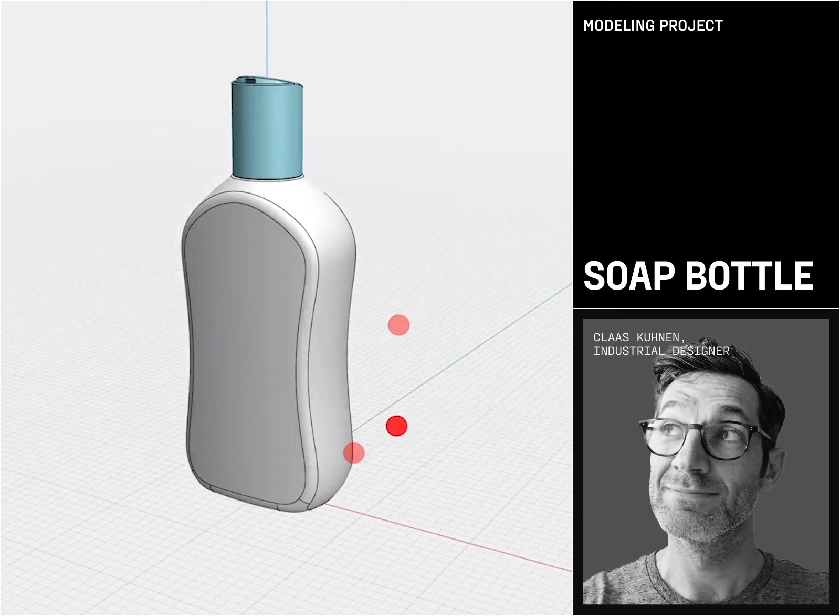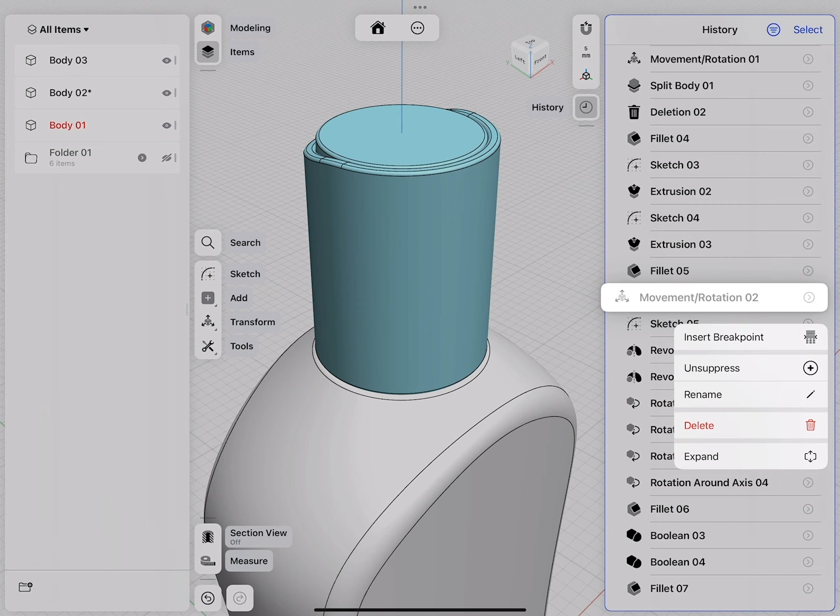Topics we will take a look at include all the necessary sketches we have to create, and then how, by using the history line step by step, we are going to create the building blocks of our design, and then use these basic building blocks to start adding all the details, for example edge roundings, inside shelling, and fillets, build the piece outside, create a functional cap, and even use the ability to resume and suppress features to prototype various stages of how elements could be rotated and manipulated.

And then we will finish with a really nice looking product presentation, adding some colors to the background and materials for an adequate color material study. And with all that said, let's do it.

So here we are inside a new and empty design. The first thing we want to do is make sure all our snap options are turned on and also our unit system is set to millimeter. A bottle is a revolve body.

So the easiest way to start is by going to the front and creating the front profile to revolve. I'll move the screen down a little bit. Go to sketch and we will start with the line tool.

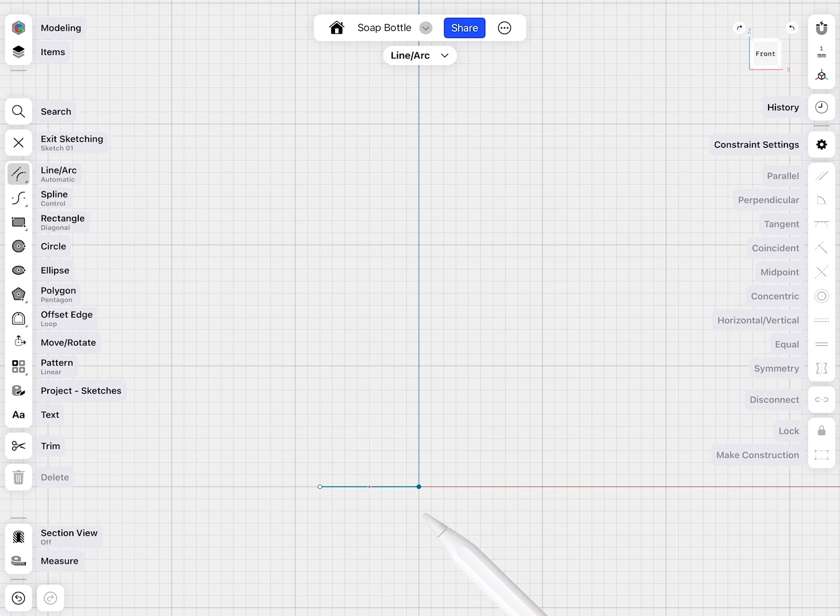At the center of the sketch where Z and X meet, draw a line to the left side. Select the first point, that is the center of my bottle, and hit the lock icon, because this point I never want to move. This line I will dimension to 30 millimeters, select the line, and also constrain it to be horizontally aligned. I can zoom out a little bit.

Then I draw a line straight up. This line will be 150 millimeters and vertically constrained. Zoom out a little bit more.

And then on top, I can draw a line to the left side, make sure this is horizontally constrained. And this is 15 millimeters. This is, for example, the top diameter, and 30 is the bottom diameter, and the 150 is the height of the body.

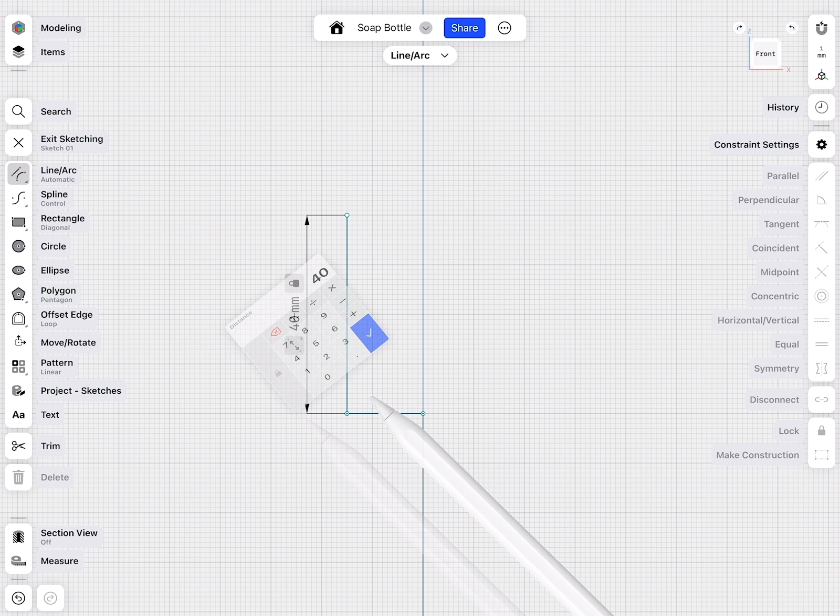Since we have the line tool active, we can zoom into the top and actually put in a preliminary geometry for the cap. This will be 40 millimeters up, vertically constrained. Then I can go to the right side and go down and make sure that these two lines are horizontally and vertically constrained. So now, as you can see, I have 150 and I have 40 millimeters.

To show the dimensions all the time, we can turn on always show the dimension, also always show the constraints, or leave this off. And then when we select the line, we see everything that is important.

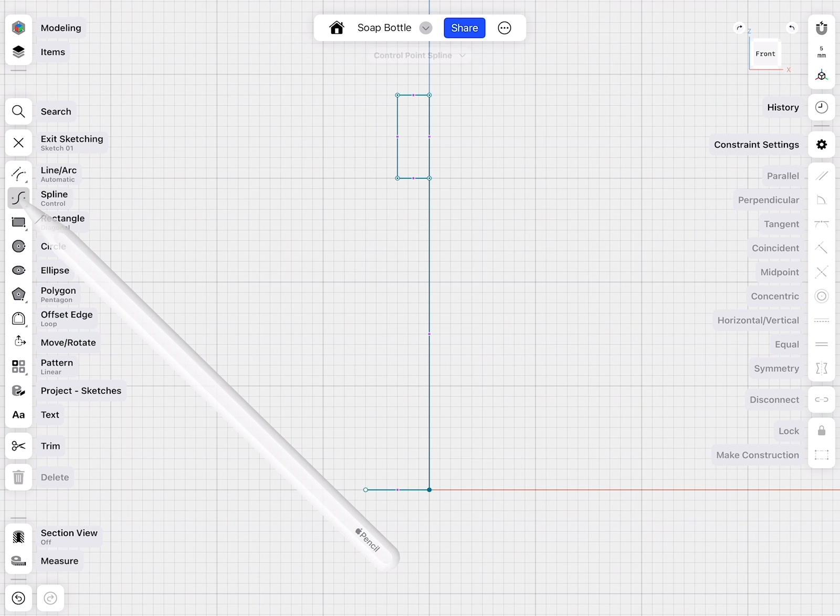We can now actually go ahead and create the spline to sculpt the shape of our bottle. Go to the spline icon, double tap it, and then you have the option between the control and the fit point. We're going to use the control one.

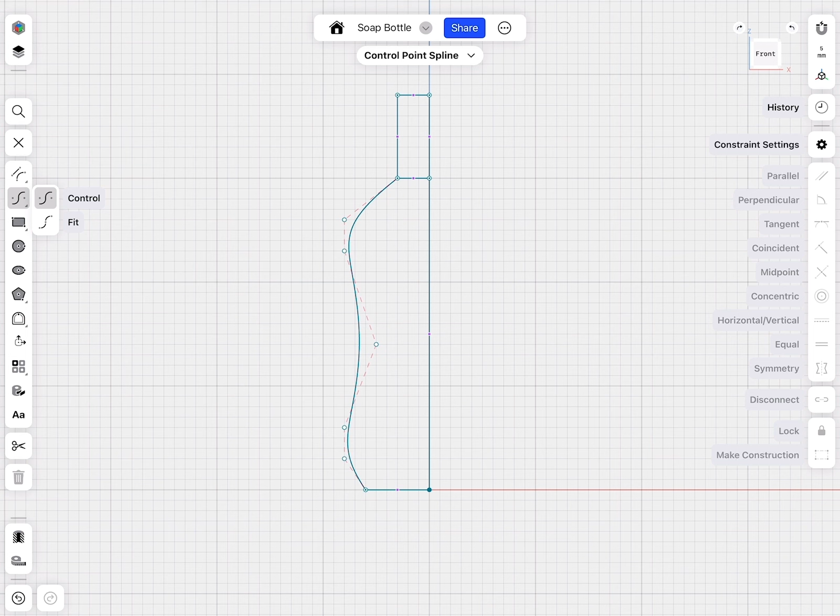So what I will do is, from the top, I start drawing, and I press, go down, press, go to the center and inwards, press, go down, outwards, press, go down, press, go to the end, and release. And you see this creates a really beautiful shape.

What I can do now is play with the distance of how far these points are apart from each other. So here I will make this a little bit smoother by bringing these points down so they all have exactly a similar distance to each other.

On top, I would like to have a sharper corner and also a nice and long part on the curve. So there you see the distance is actually much longer between these two points than these two points.

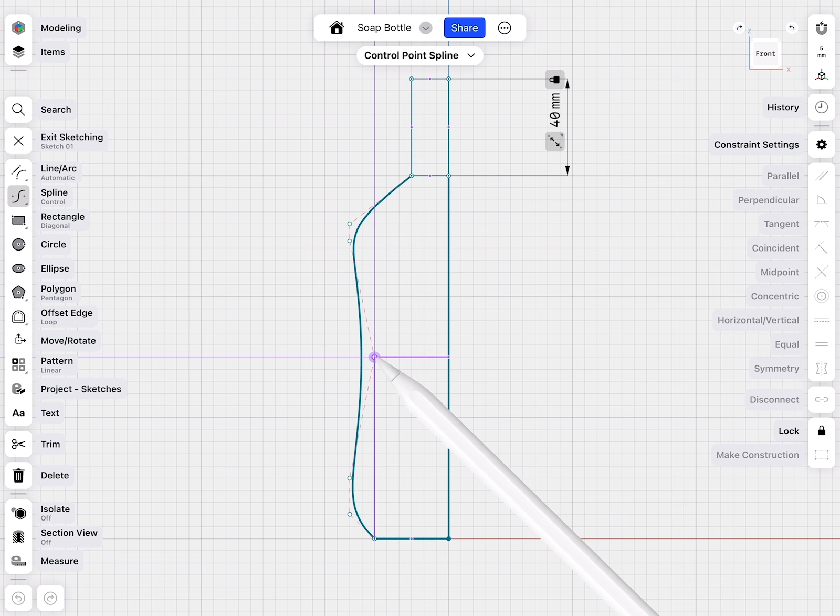And then with this one here in the center, I can play with how much this bellies in. And that, for example, is in the space where the fingers kind of go around the bottle.

At this point, we kind of have everything to make a quick prototype. So we'll select in the sketch the profile of the bottle, then select a vertical line with the z-axis and click Revolve. This hides the sketch.

So we can show the sketch one more time. And then select the sketch profile again, select an axis and revolve. Beautiful. That's good.

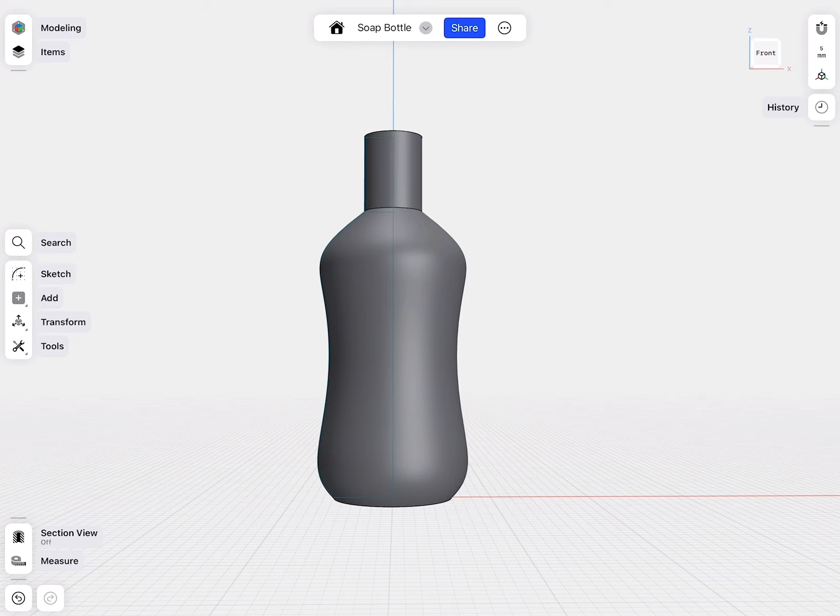What is actually really nice is we can go ahead and select the sketch, go into sketch edit mode, select nothing, and then when we select individual points, we can move them around and see how this updates the shape of our bottle on the fly. That's actually really beautiful.

Even history-wise, the sketch is created in front, so before the revolve bodies, we can edit steps at the beginning and see how this influences the rest of the construction in real time. This is super amazing, very good.

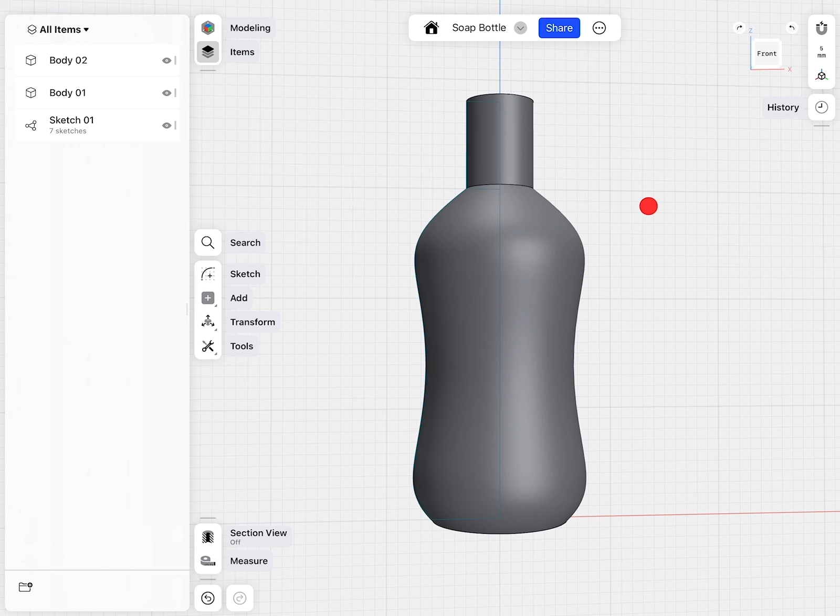This bottle is very round, and all I want is from the front to see this nice curvature look, but actually from the side it should be more flat. So I need another sketch. I will go to the bottom.

Then I will go to sketch. And you see actually when I do this, I have all these sketch intersections to prevent, for example, any accidental snapping. I can turn everything off and then actually create the circle so I don't snap to a piece of a sketch or geometry where they intersect.

Very good, change my view, rotate, exit the sketch. Then I can show everything. And you see that the sketch also sits directly at the bottom of the bottle. So you can just select the sketch and you see where it intersects with the bottle.

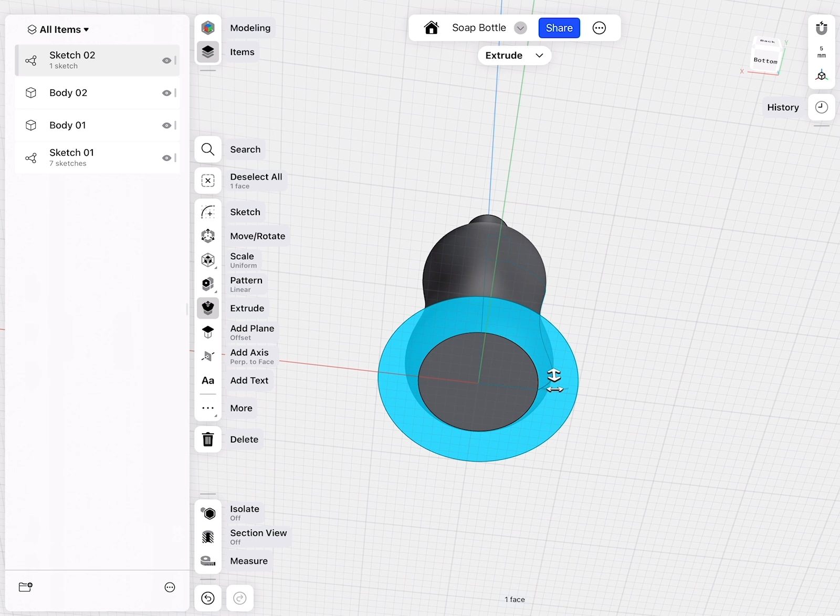This is a new profile to select, and that's not really what I want. So what I will do is select the sketch, exit it, and then simply move this down a little bit. How much is up to you. Beautiful, you see now I have just one sketch profile.

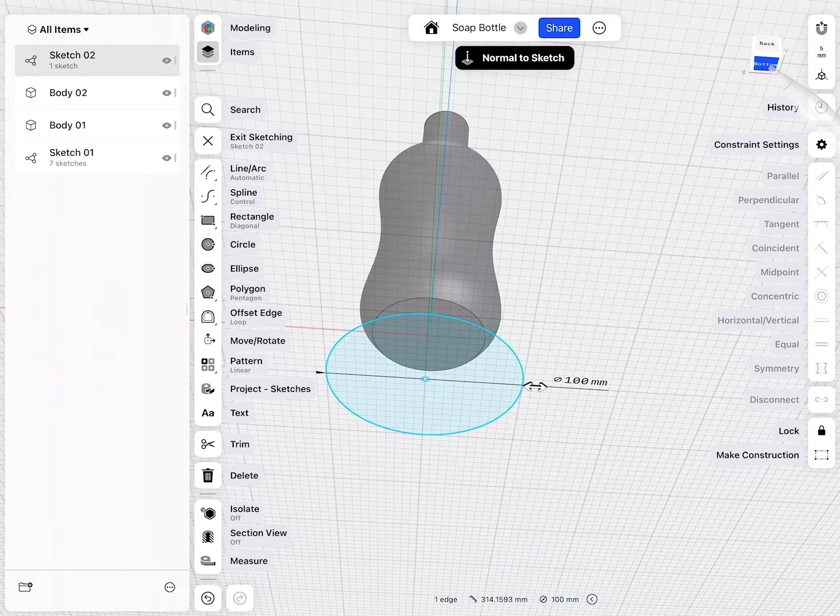So let's select the sketch, going back to the bottom view. And with the spline command, I can now go ahead and draw myself a nice curve. And there, beautiful.

When these two splines are not connected via a symmetry constraint, I can model every spline basically independently. And if I would like the front and back spline to function like a mirror, then I have to create a Y and an X symmetry. So let me show you how we can do this.

This is very easy, so I will select the line tool. Along the Y-axis I make a line, and along the X-axis I make a line. I select both lines and lock them so they don't move.

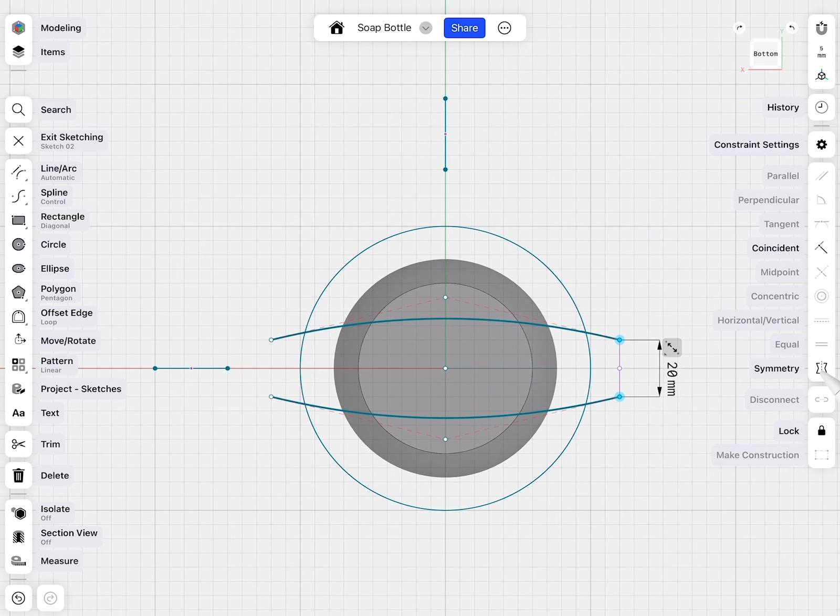Select nothing. Then I select two pairs of points, symmetry and the X-axis, the opposite symmetry axis and the center points and this axis line. When I now select one point, you see the opposite moves.

Pretty good, but you see here, when I go left and right, now the right point doesn't move. So this is where we will select the left and right points, symmetry, and then we lock this to the other line. And then when we go ahead and move these corner points, there we are.

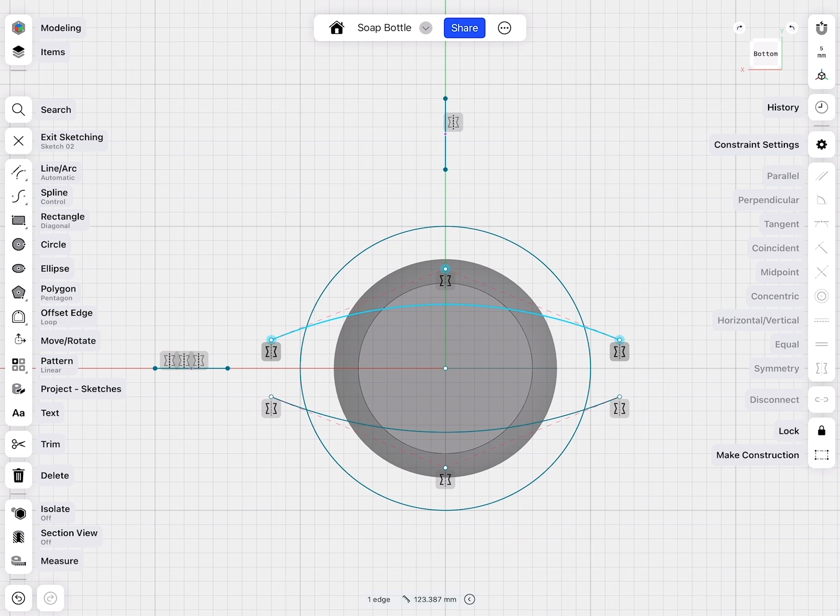Now I can go ahead and, for example, move this one up, move this one down, or stretch this out. And by this, essentially with this line, I can project how I'm going to slice the bottle. Okay, so let's do this.

We will exit the sketch, select nothing, select the sketch profile, and then hit the up arrow, extrude, and then we cut through the bottle.

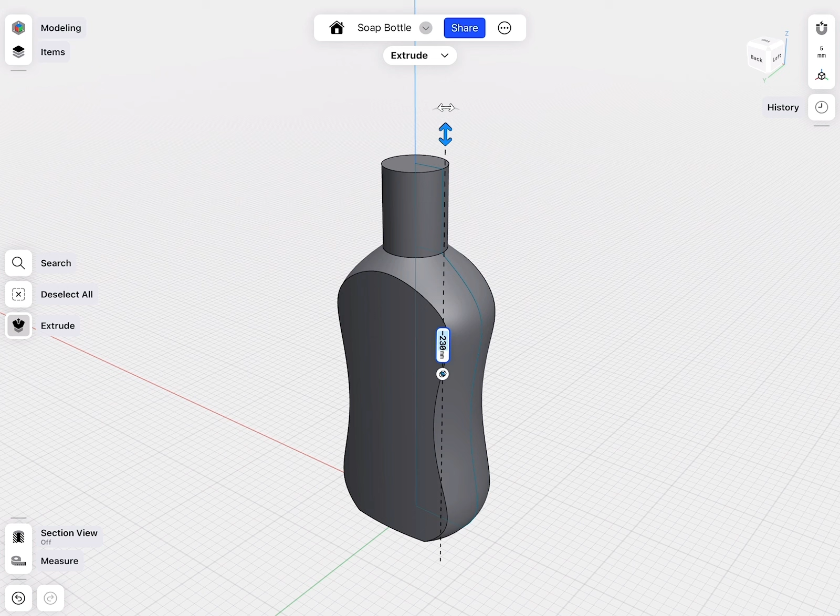Obviously, I don't want to remove the bottle, I want to actually remove the outside. So by clicking on this tiny icon with the white sphere and the blue cube, I can get into the Boolean command and decide to either union, new body, subtract, and actually I would like to use the intersect command. That basically gives me the volume of how these three objects, the cap, the bottle, and the thing I extruded, intersect.

Beautiful, very good. Again, one little tiny demo. When I go back to editing my sketches, I see everything in real time. It's actually really nice how this works.

And the same is also true for this one here. I don't have to go even into a 2D view. I can prototype this by selecting the sketch, go into sketch edit, and then use the grid for the movement. There we are, perfect. Okay, so this looks actually pretty good.

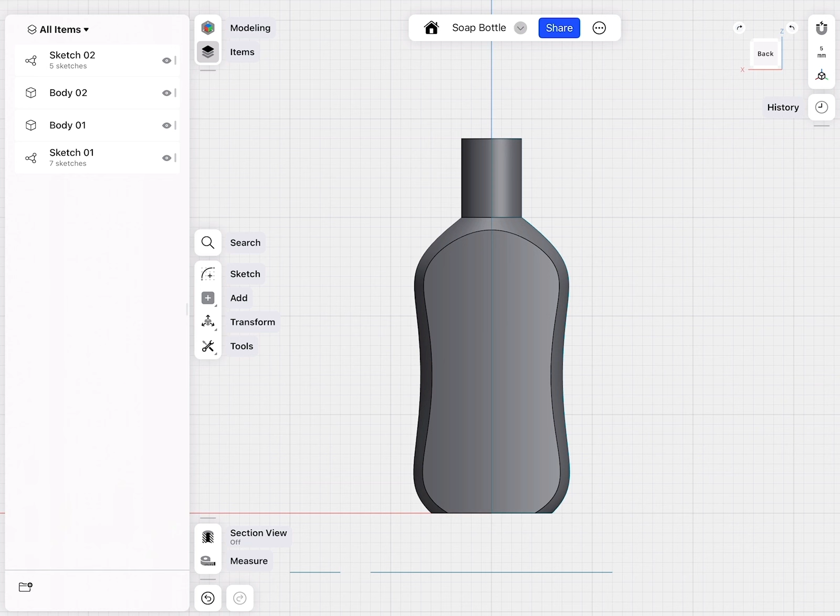So we have the main bottle and the cap, but we don't really have the neck that goes onto the bottle.

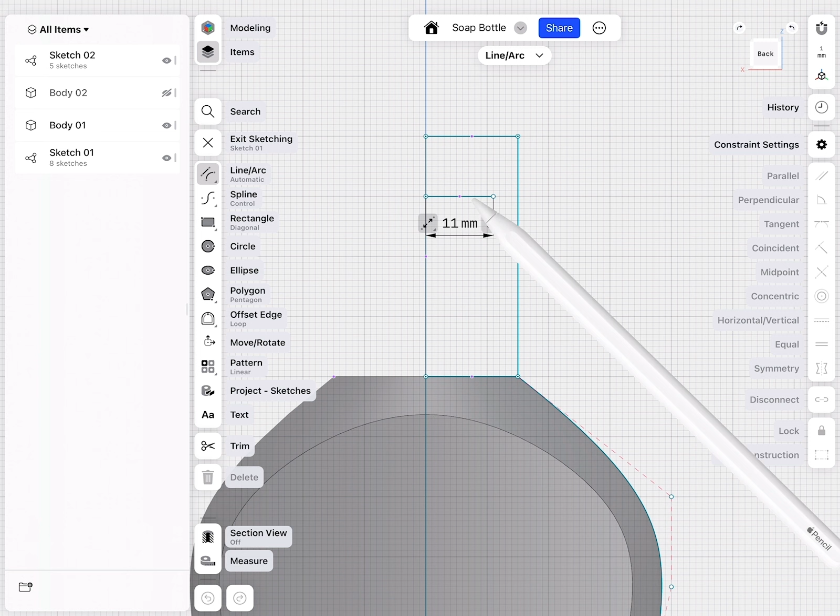And this is where I will go ahead and select the first sketch we created and edit it, and create two more lines that go inside. One line to here, this should be 11 millimeters and horizontally constrained. And then one line straight down, vertically constrained, and this line should be 30 millimeters. Very good. Cool, okay.

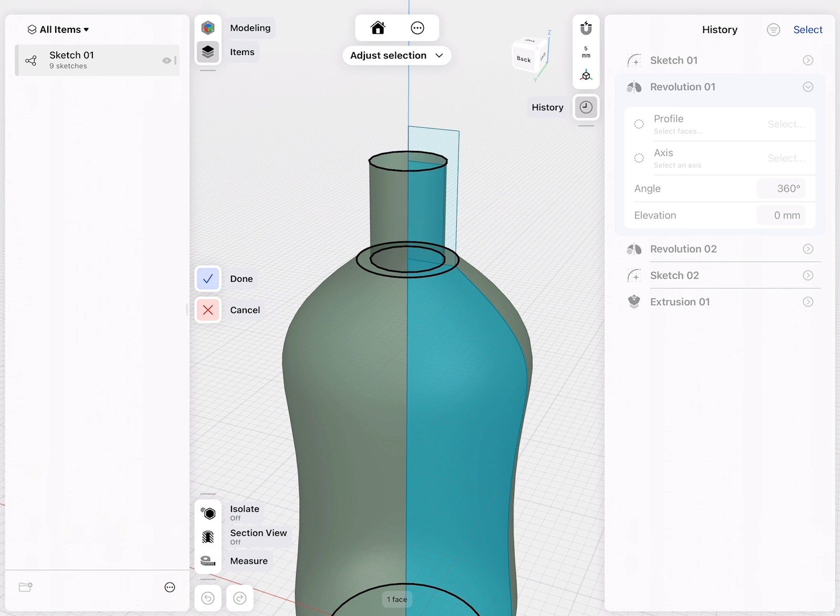When I now open the history, you see I have my first sketch, my two revolutions, my second sketch, the extrusion, and when I click on the first revolution, there I see that this is actually the feature that created the main bottle. I click on the arrow on the right side to expand it. Here I have profile and axis. Click on edit for profile, and then I will add this sketch profile I just created to it. Click done, and I have updated my design.

That's actually how easy you can create different iterations, and you start with very basic models, and then step by step we create more refined complex models. Very good.

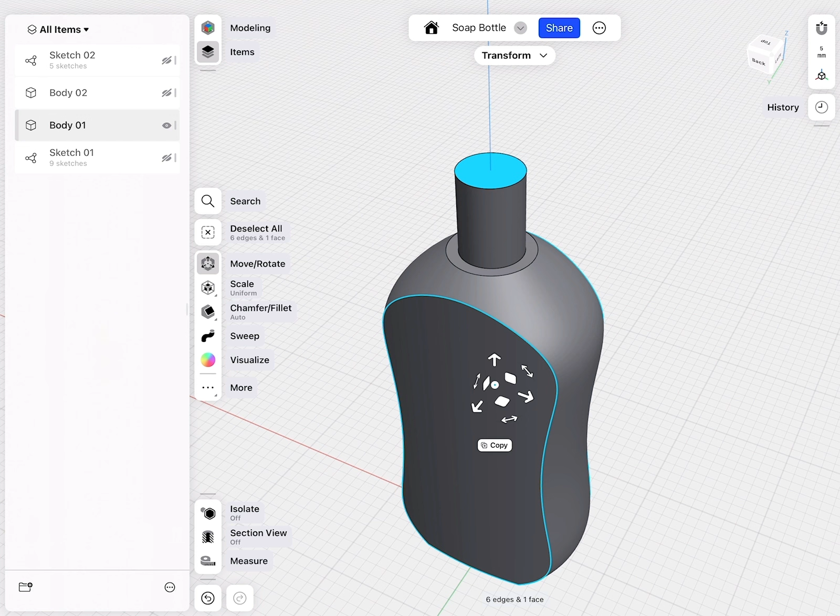So let's actually refine this bottle. I will turn all the sketches off, so I only see this bottle, and I can pay attention to how these edges all meet. There are various different ways how we can fillet them and round them. We want also later to shell the inside. So before we do our shelling, we want to round all the sharp edges on the outside, because in the shelling command does actually the work of the inside, because the rounded edges will shrink down to the inside. And we'll see this in a moment.

When I select this edge, just as a demo, just don't follow it, just take a look. You see how I can round this vertical edge. Then I get these nice rounded corners, edges, and then I can round this a second time. And then what you see is we get this connection where we have kind of like two profiles which are rounded, and then this centerpiece. But we have here very sharp corners. That's not really very nicely looking.

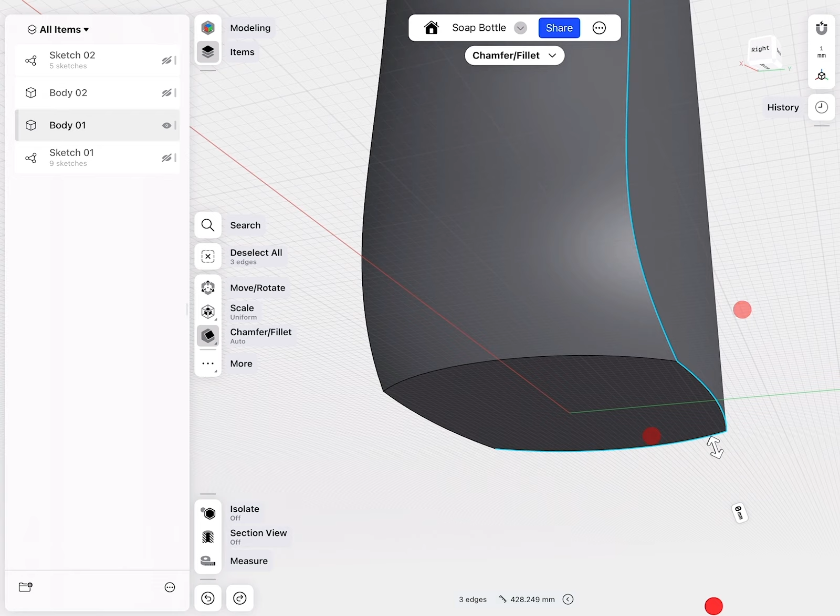So I undo everything. We can actually select all edges at the same time. There we are. And then we drag the arrow to round this. And pay attention to how this looks. This is nice. And then we click the cog icon and switch the corners from rolling ball to setback. Takes a moment to calculate and take a look at these beautiful corners. They look actually really great.

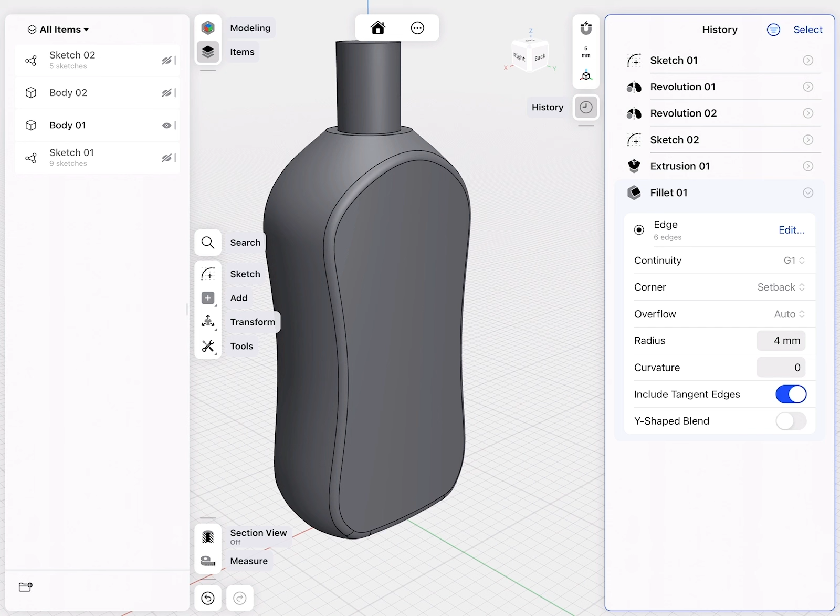We want to adjust the radius of the fillet. We can go to History, look where the fillet command is, click on the arrow to expand it, and then change the radius. There we are, it's very easy. We could also select a face of that fillet, and there you see it says Edit Fillet. When we click on this, then there we go back to the original command, and here we can change that value. So same thing. Okay, so this is actually done.

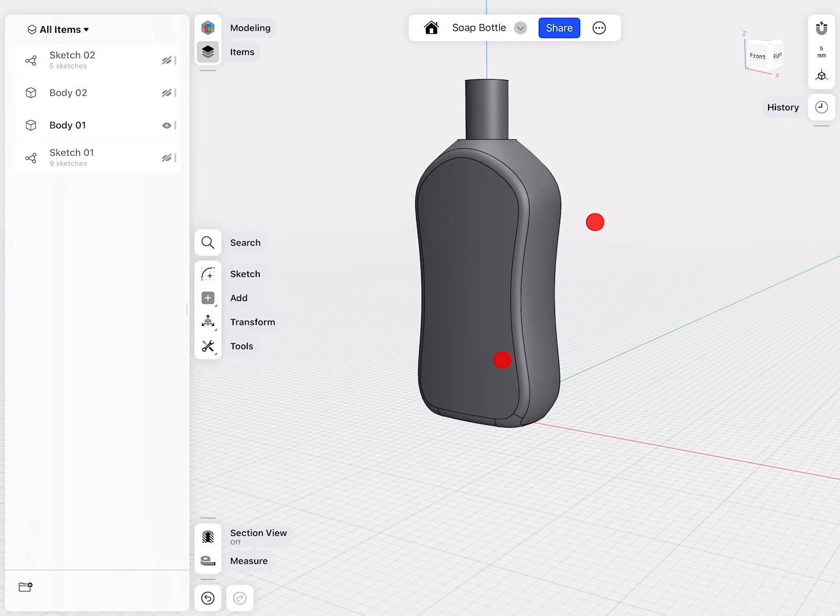That's good. This corner we can keep sharp. That is fine. This one I would like to round a little bit, 1 millimeter. This looks sufficient. And now actually the bottle is ready to be shelled.

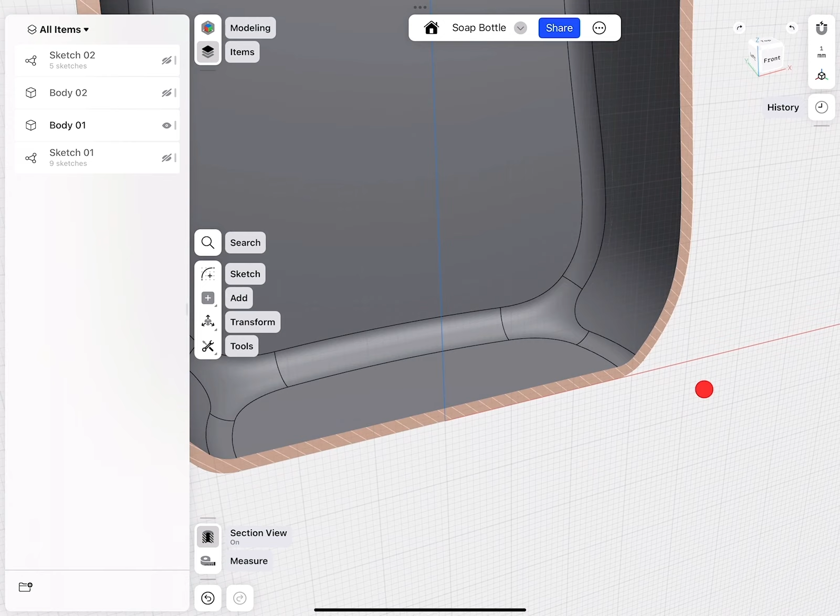So I can select the top face, go to shell, and I will select 2 millimeters, which is a little bit thicker. I do this on purpose because it's an easier surface to see. If I go to the front view and then at the bottom left select section view, we can take a look into that space. And there we can see how we have also inside all the edges. See, that's the reason why we fillet the edges first, and then we do actually the shelling, because it does create this for us in the inside with a perfect material thickness.

I have here a very sharp edge. If I would like to round this, I could also round this fillet, sorry, this edge, say by 1 millimeter. Very good. Let me show you something.

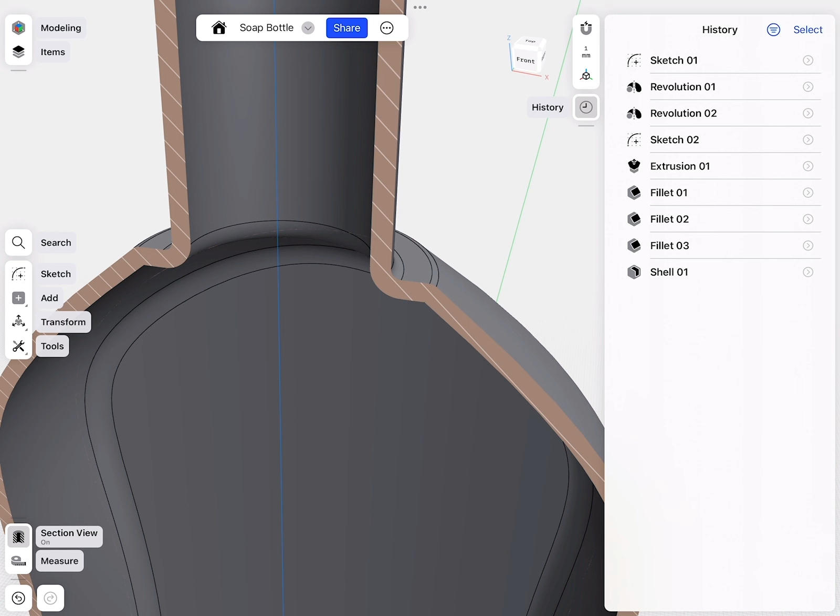If I go to the history view, here's my shelling command. Here is that fillet command. And if I press onto it, hold, I can drag this in front of the shelling. And there everything is updated. Beautiful, pretty nice. This is actually a pretty big fillet. Change this a little bit. You see everything updates for us automatically. Pretty nice. Very good. Okay.

We can zoom out a little bit and then go to turning off the section view, and there we are. So we have now actually the main bottle and the neck done. We don't have the threading. The threading is something we can do actually later. It's a complicated task, and this actually only makes sense when also the cap is done. So let's go ahead and prototype the cap a little bit.

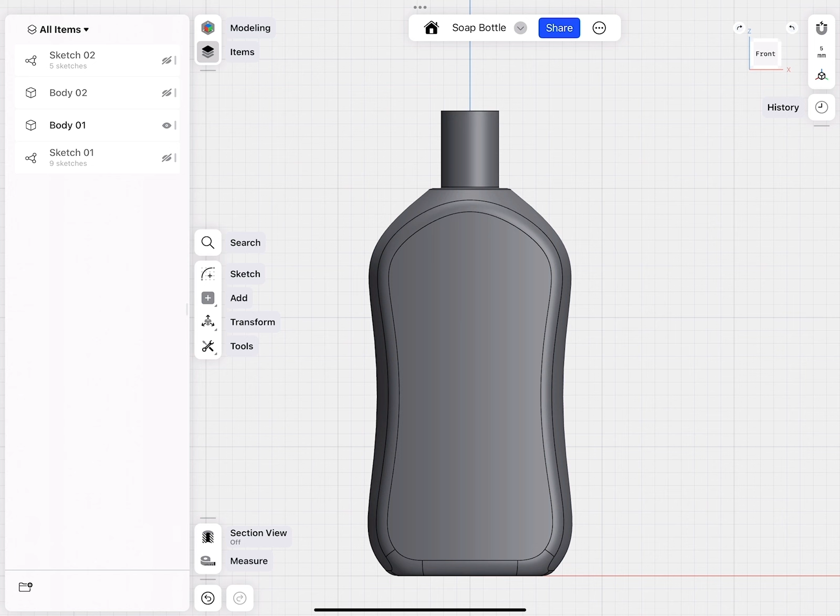I will go to items. Sketch 01 was the first one we created. That has the basic dimension for the cap. Currently the cap is only a cylinder. We would like to change this obviously now.

Let's go ahead and edit this cap. I would like to have a wall thickness of 2 millimeters for this cap. And the cap actually has a lid on top that can swivel.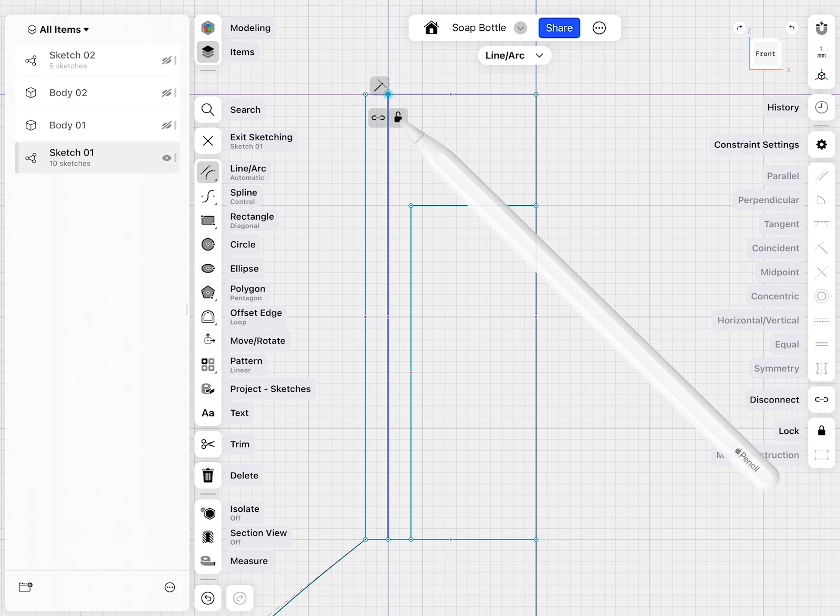So I need to define now a vertical line here. I draw one line down. I will also hide the geometry, so this is easier to work. You see I drag the endpoints onto the edges, make sure this is vertically constrained. Then I can select these two lines and make sure this is 2 millimeters.

Very good. This is good. Perfect. We have a swivel. So here's the horizontal line, and this should be around 4 millimeters. Perfect.

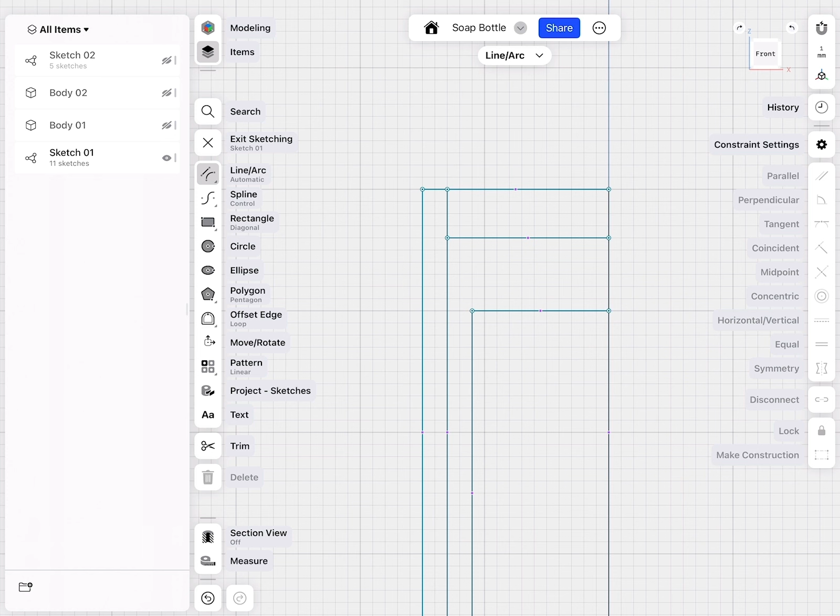Now when this cap rotates onto the neck, it should seal it a little bit. So I would like to have here a very thin horizontal kind of cap or lid that goes over it, and then we cut a hole into it for the fluid to come out. And I need one additional horizontal line, at 1 millimeter. Very good.

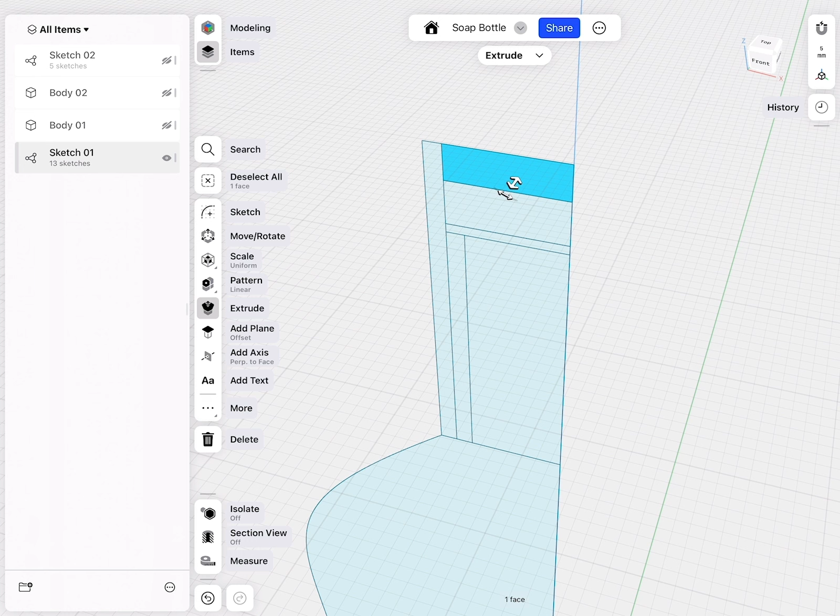So if I zoom out a little bit and only select the elements for the cap, main body, that's this. This is actually the space where the threading goes in. This is a cavity. And then this is the part of the swivel, kind of like the button that can rotate to open and close. Very good.

And as before, we can go to the history. In this case, it is Revolution 2. There we are. Open this, go to Edit Profiles. And now I deselect everything and then just select only what I want. That is it. Click OK.

There we are. Look, we have actually updated that geometry. So you see, we don't really create basic geometry and then make new ones. We actually build basic geometry and then we can start adding more elements to it.

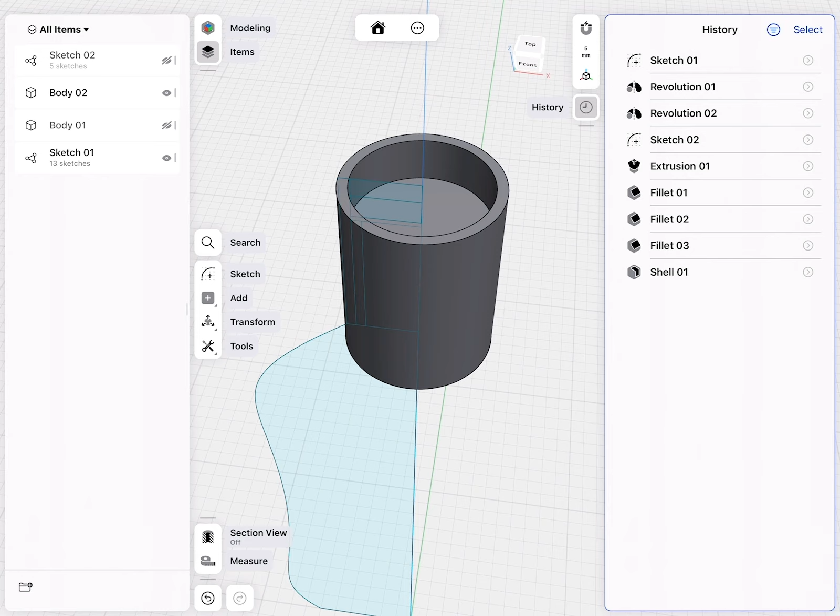We can close this a little bit. There we are. We can then select this upper sketch profile and select this line and do a revolve. That, for example, is the part that can rotate. Just with a finger press, we move one side down and then the other side goes up.

Okay, beautiful. Good. So the interesting element now will be to prototype the mechanics. So this is a cylinder that sits inside an open cylinder. To rotate, this is not necessarily going to work this well.

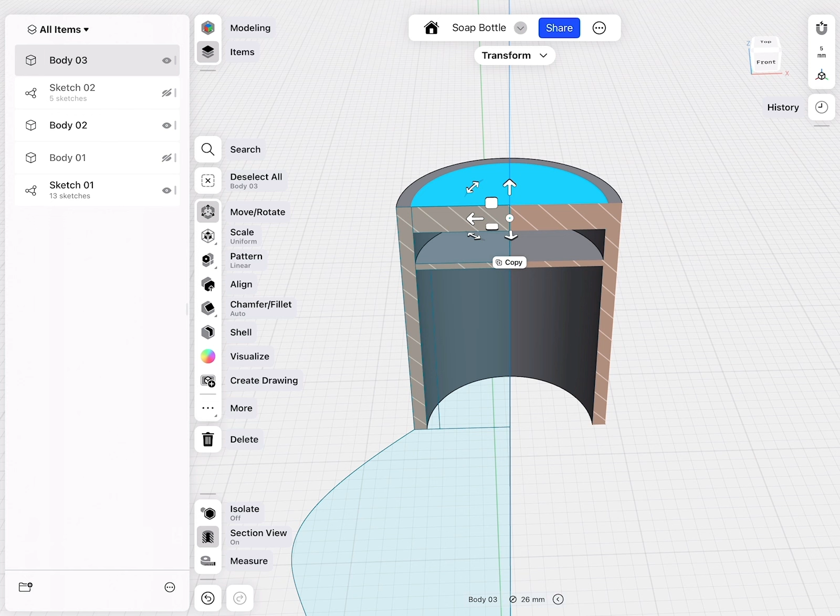We might need to change the thickness a little bit, or we can also round this a little bit. So this is actually going to be the rotation axis. So that dictates that from the front, when we go back to the sketch, turn off the section cut,

Right here between these 2 points, this straight line needs to be changed a little bit. Kind of like it needs to be a little bit round. So we can do this very easy by turning everything off so it's easier to see. Then I will go to the line arc command and create here an arc. There.

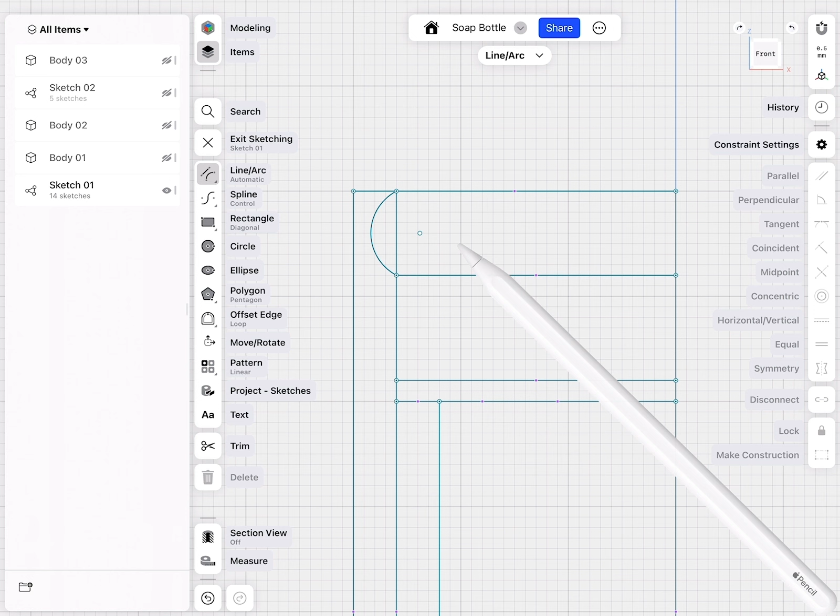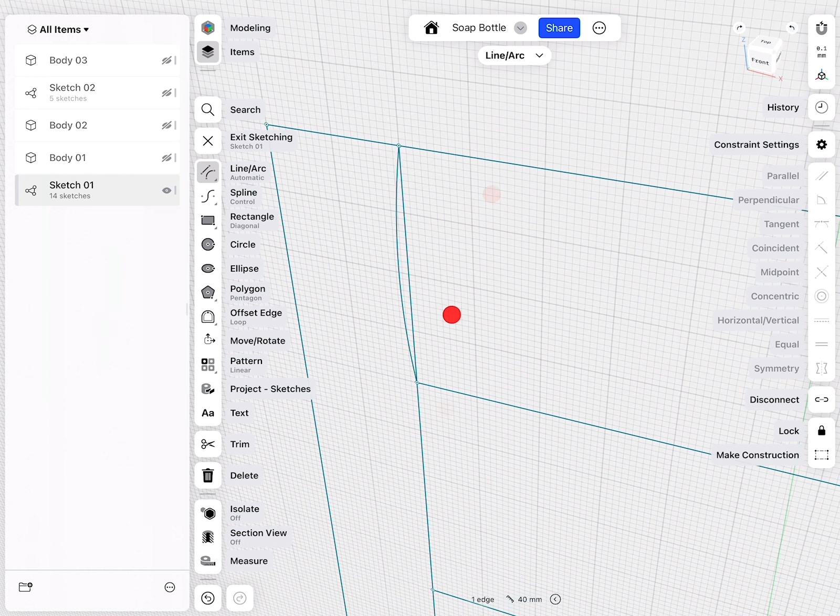And then this point I simply drag over onto this axis, because that is the revolve axis. And this tiny extra profile I created, this one, I need to add to the rotatable part for the revolve and also remove from the housing. So can go ahead.

Here we have actually two movement commands. I can press and hold and say delete. I don't need those. There we are. Very good. And there is this revolve command. I can go to profile and then I will add this one simply to it. Beautiful. And there you see.

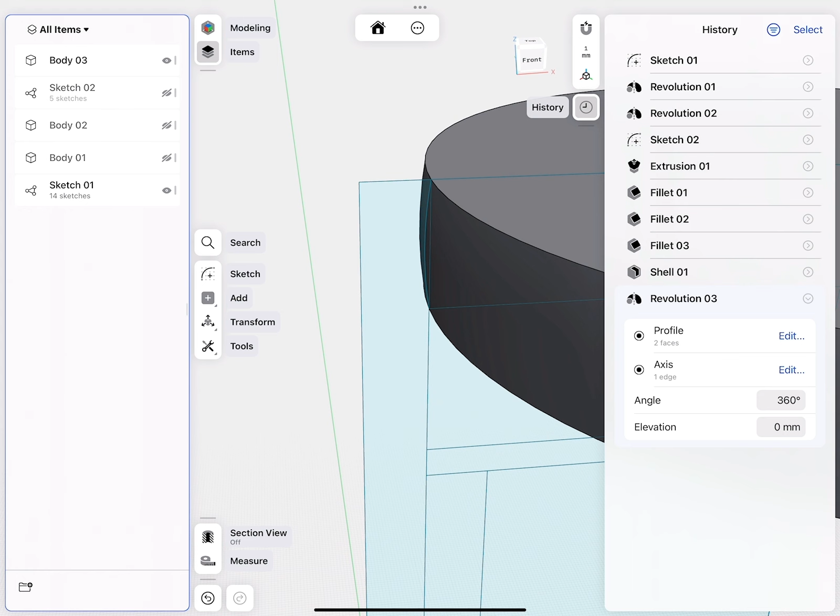And then from here, I would like this tiny element to be removed. Go edit and there, click on it. It will deselect everything there. Just select this one then. And there we are. Perfect.

And there you can see we have that space for it. Really good. Okay. Beautiful.

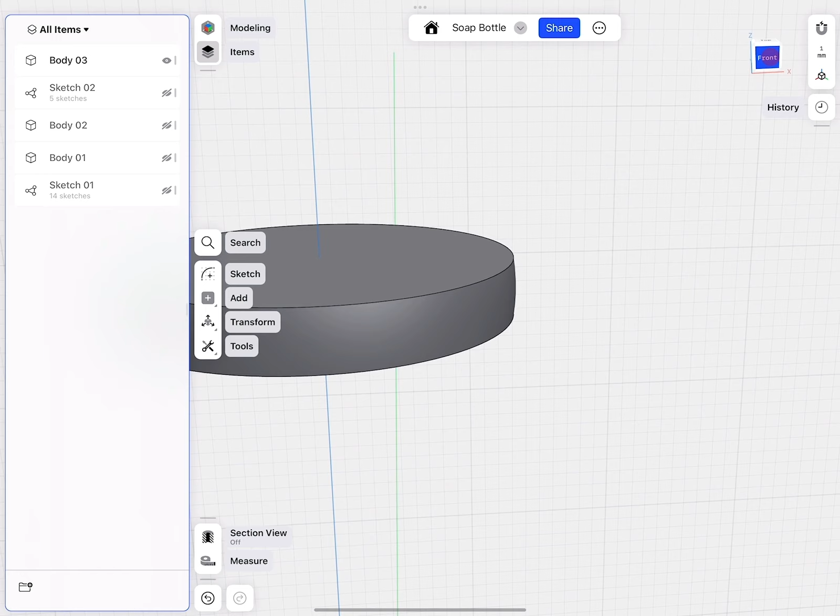Now there will be actually in the front an opening, and also in the inside we will shell out. And for the rotation left and right, we do need some sort of sphere or something, kind of like a joint. If we use a sphere, that's very easy to do because we add it to it, and then we can press this cap into the housing.

So we can go back to our first sketch. There we are. I kind of see where this one is, and I will add this actually on the other side. Now I have to be careful how much material I have, so they're like 2 millimeters.

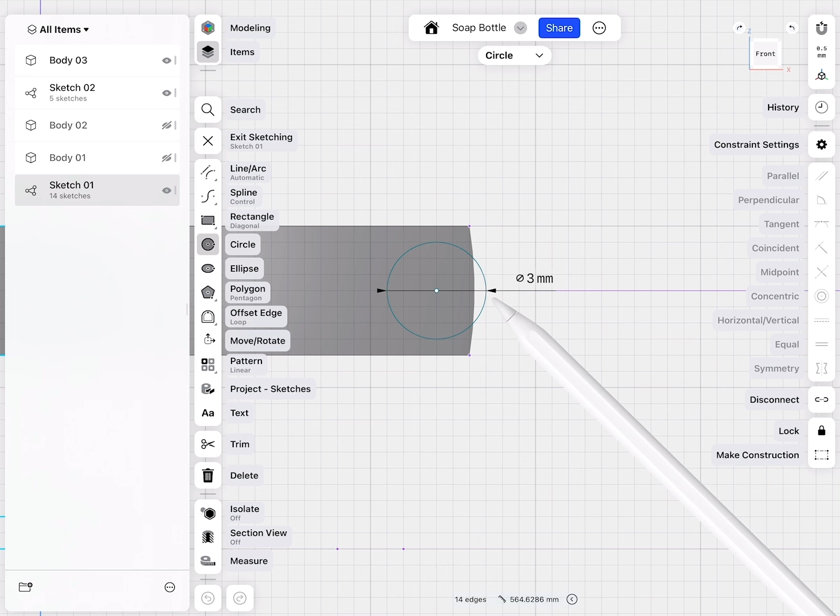And I will draw a circle roughly here. This might be height-wise okay. Select the center point, and then I can move this out a little bit. There we are, very good. And then here I draw a line straight up and straight down, make sure these lines are horizontally, vertically constrained. 3 millimeters, that is good.

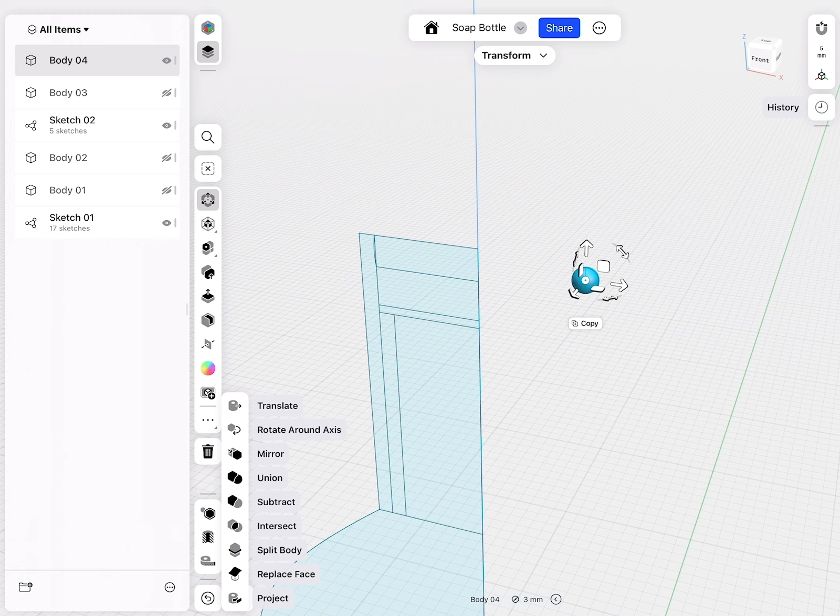I will now hide this body and select the sketch profile, select the axis, and hit revolve. Now I have actually one kind of joint. This element I would like to mirror over to the other side. So I select the 3 dots, expand the menu, select mirror, keep originals on, and select this mirror plane. There we are, perfect.

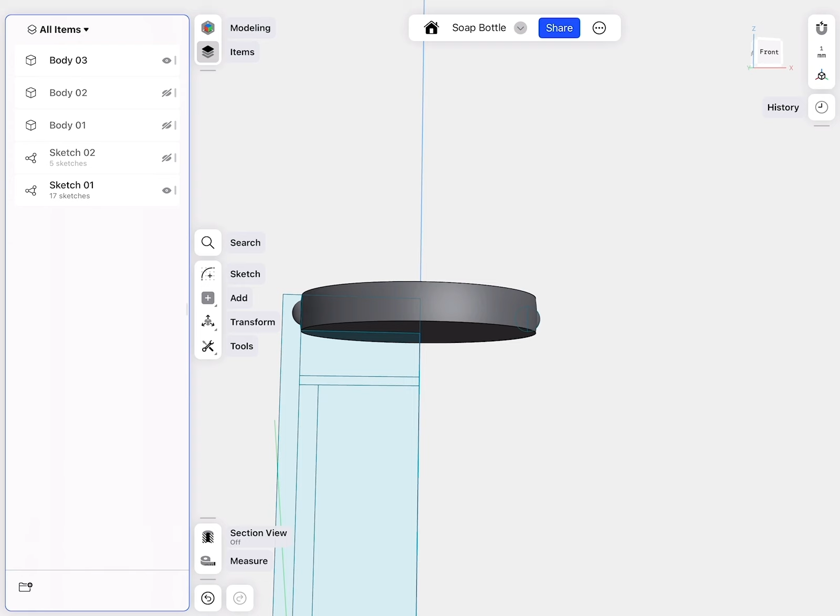Then I can now show actually all 3 bodies, so the 2 spheres and also the cap, and join them together. I move the sketches closer to each other, so it's easier to select them all. There we are, the inside, at this point now we can shell out. I will do this with 1.5 millimeters, so it's a little bit easier also to see. A more realistic value, for example, would be 1 millimeter.

And then we have these holes here, the leftovers of that shelling command. Not a big deal, simply select them, and then we press delete. And then that cleans it up.

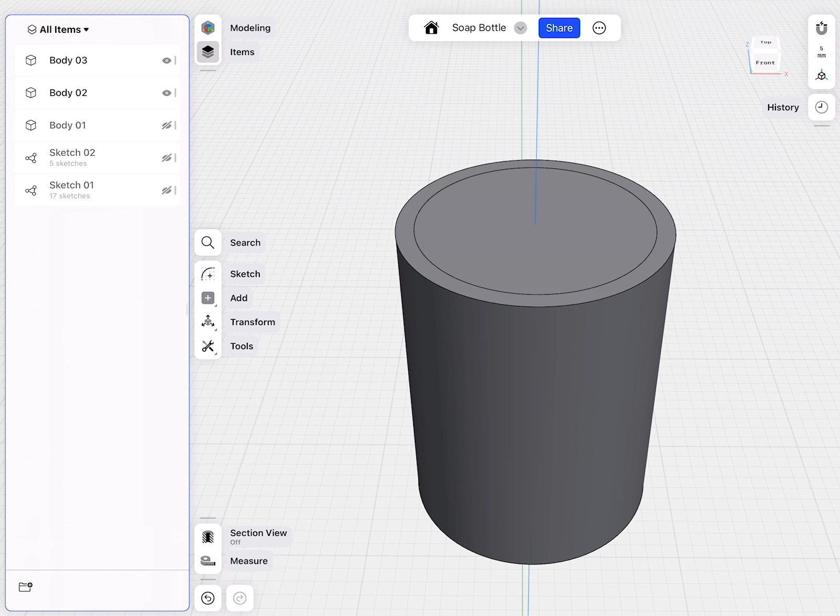Now, because we added the spheres to the cap, we don't have that yet inside our housing. It's not a big deal, we can simply remove it. So from this one, from the housing, I would like to remove the cap. Select subtract, so you see I double clicked actually both bodies. And then the keep originals, we want to keep the removed body.

We can actually rename these parts, for example, so it makes more sense and it's easier to find. It's a suggestion I can give you. And now there you can see how we have these openings. Because these are spheres, you can all see it. It's going to be very easy to just simply force press that into it. Beautiful.

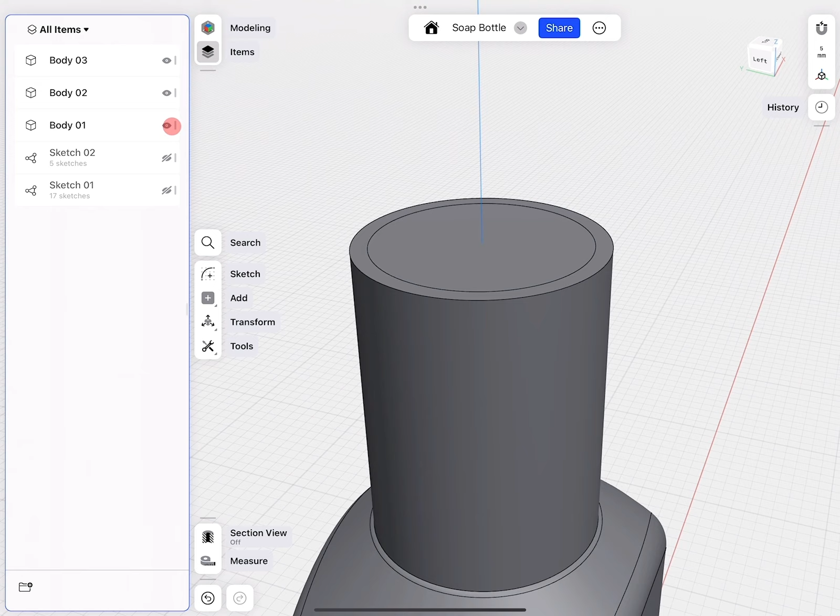Okay, so we're making good progress. The next step is we can prototype how we can rotate the part and then where the opening is. So let's see how much we even can rotate this one. When we double click this, because this is actually just 3 millimeters, the center of rotation is right at the center there. Perfect.

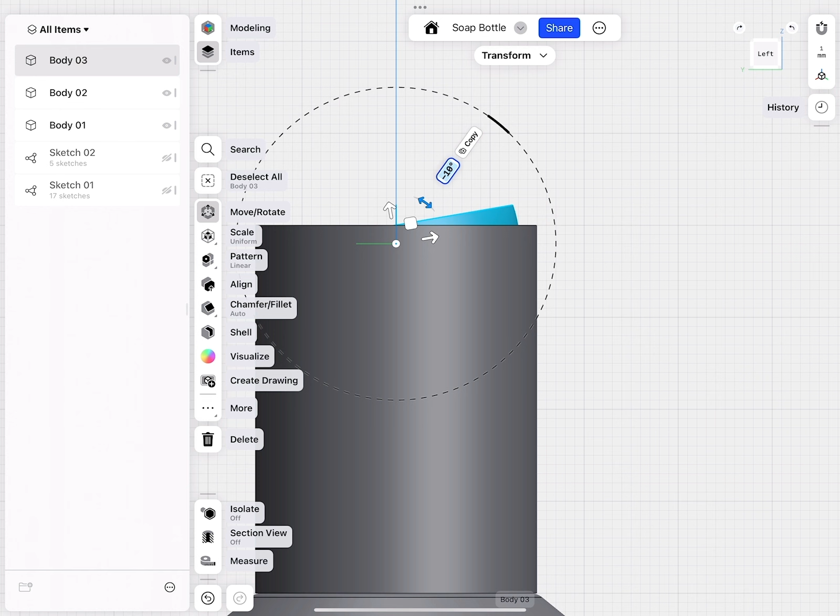Which means I can rotate this. So this is 15 millimeters. That's actually the max, 10, 12... 10 millimeters, 12 millimeters degrees of rotation. That will work actually pretty well. Go to the side view, select nothing, section cut. Now there we can see how nicely this seals. Pretty good, okay, so 10 millimeters.

Sorry, degrees. Go to the history. We have no movement command because I hit actually the undo button. What I will do now is I would like to take this surface and shave off the back area at 10 degrees. Section view off. How do we do this?

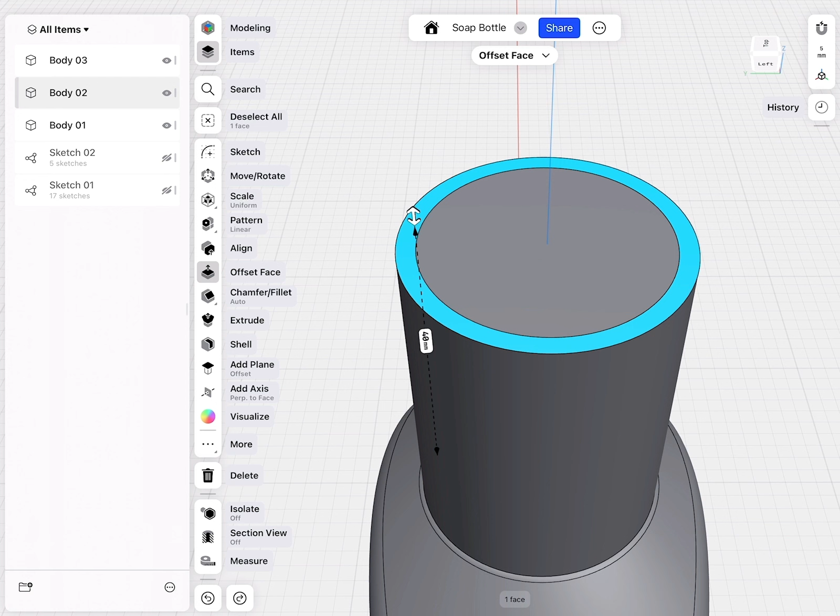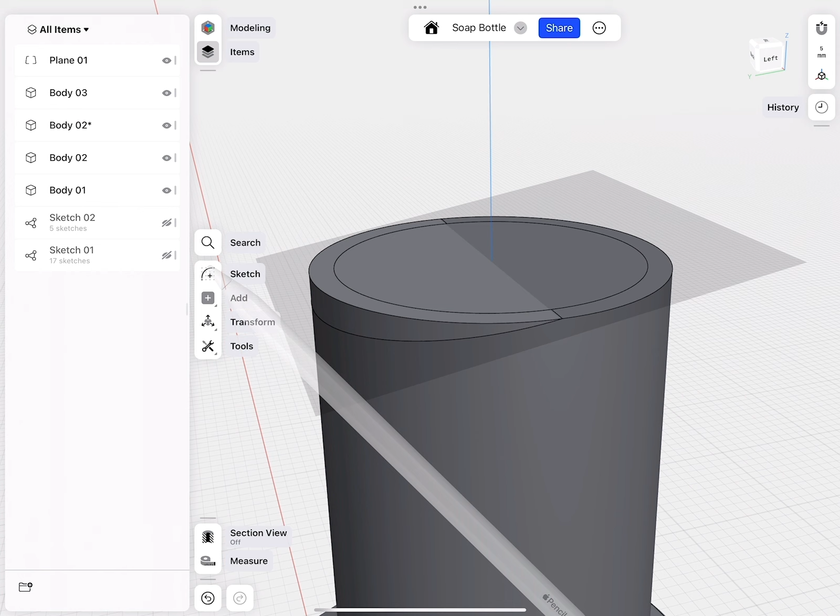Super easy. Let's just create a new add plane. You see I have the top face selected and I just create this plane. Don't move it, select the plane and then I just rotate this one by 10 degrees. And with this plane, I can now double select the housing cylinder, select the plane, select split body, click OK. And then this piece, which we split, I remove. There we are. This plane I will drag down and hide.

We don't really need this anymore to see, but we can understand, no? When we rotate this 10 degrees, how this perfectly lines up. And because the housing is only cut at 10 degrees, I can't press the button more in. There goes a lot more engineering into such a simple cap, I'm just simplifying the design here a little bit. Very good, let's undo the movement command because I don't want this to be in the timeline.

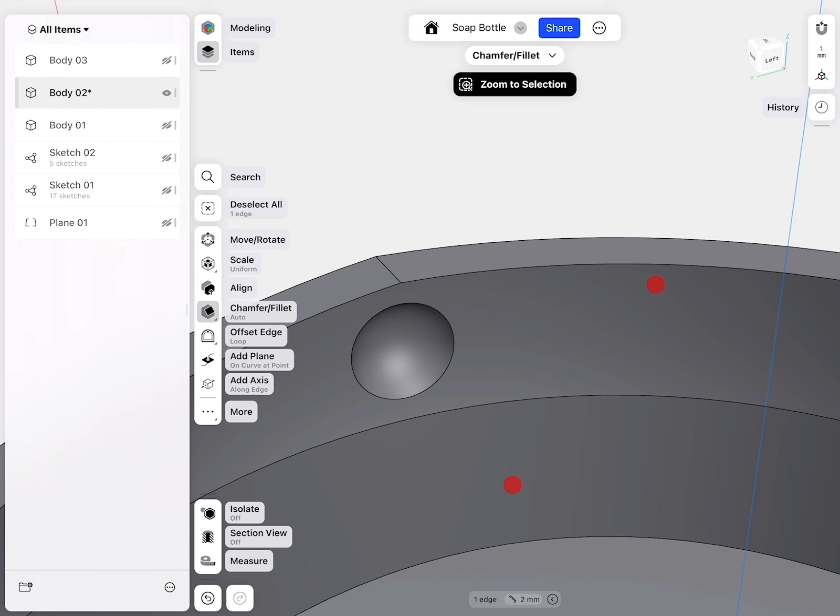Very good, nice. So since we're working on the housing here, let's go ahead and detail this a little bit. We can give this a nice fillet, 2 millimeters, so it's nice and big. That is good, and also here we can add a hole.

The opening will be where I'm pressing my finger. So when I go to select sketch, we're creating a sketch right onto that plane. There's a cylinder, and somewhere here I can create a 4 millimeter cylinder and cut through. Now this is the opening through which then the soap will flow out.

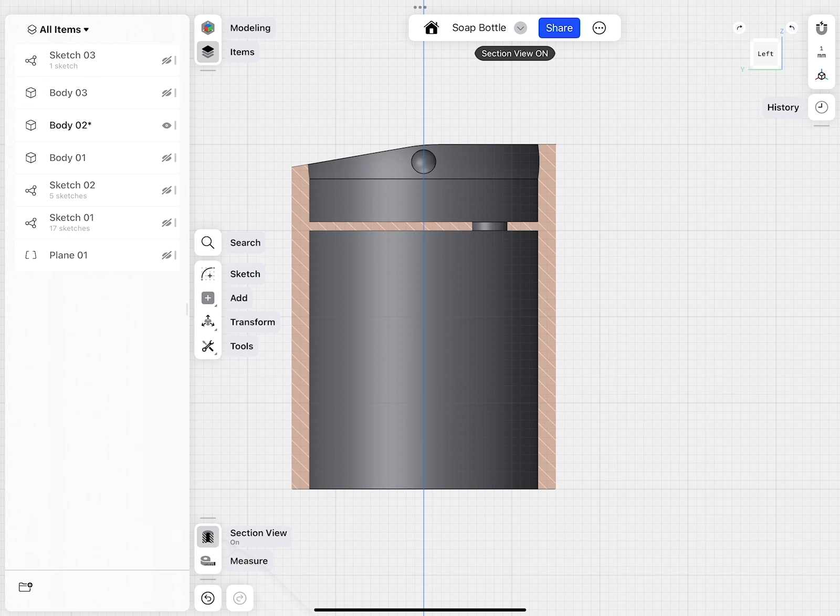I go to a side view, select nothing, go to section cut, show actually the bottle, and there you see, nearly there where it should be. I just need to move this a little bit over. Okay, not a big deal. We go to sketch 3, select it, then we're in edit mode, select nothing, just select the point, and then we can drag this along the grid to the left.

Beautiful, and we see the update of the parametric model in real time. This is actually really nice. Very good. This can go down.

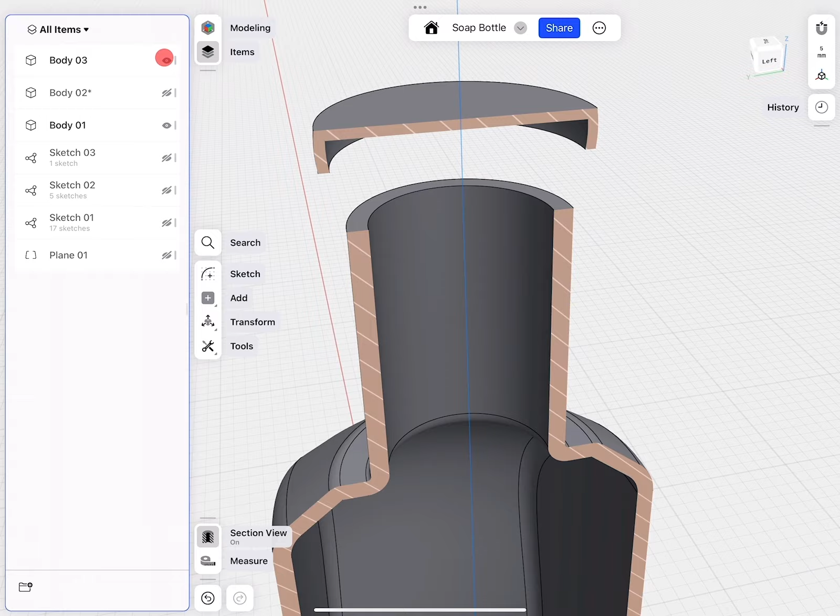Besides the missing threading, this model is actually done. So let's take a look at the cap. How do we do the opening? We can go to the front view, turn off section cut, then make a new sketch. Actually, turning section cut on now is very helpful because we see where the top area is.

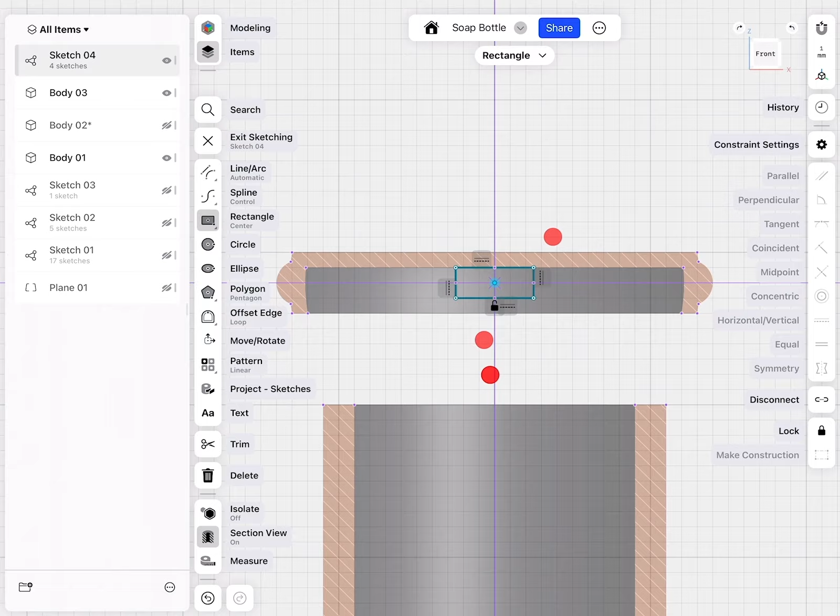Go to rectangle, tap twice, select from center, and then along the z-axis, I make here a rectangle 5 millimeters horizontally, 2 millimeters up, double tap, horizontally vertically constrained, and then I can move this one up. Ideally, right under the top surface. Section cut off, exit sketch, select the sketch profile, and then we just extrude and cut through. Beautiful, we have very sharp corners.

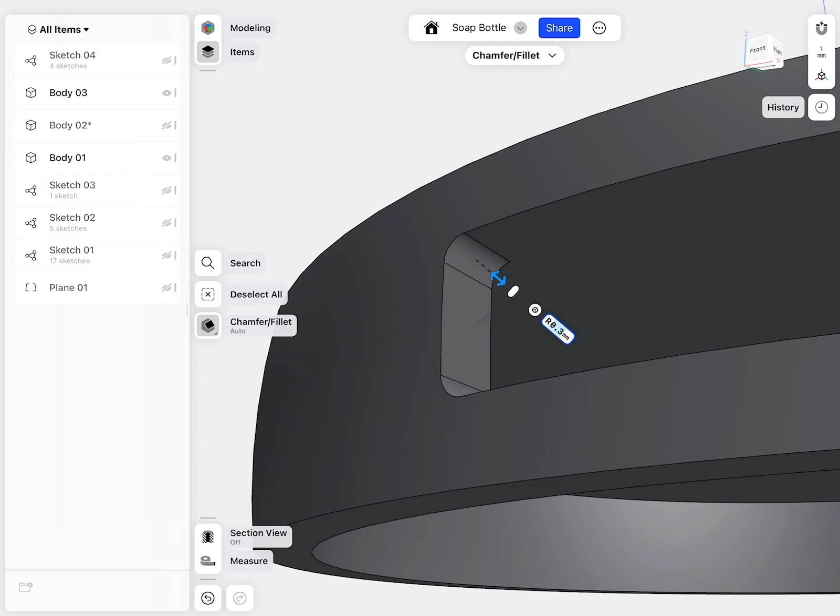That doesn't look very appealing. If we would like to round this, that's very easy to do. We just select these corners and round them a little bit, 0.3. Okay, very nice.

So if we show the other element, the housing for the cap, and then double tap our element, rotate it, and there we can see how this actually can come out.

What about 12 millimeters? And what about 13 degrees? I mean, not millimeters, sorry for this. This actually looks pretty good. Okay, now this one does not really match.

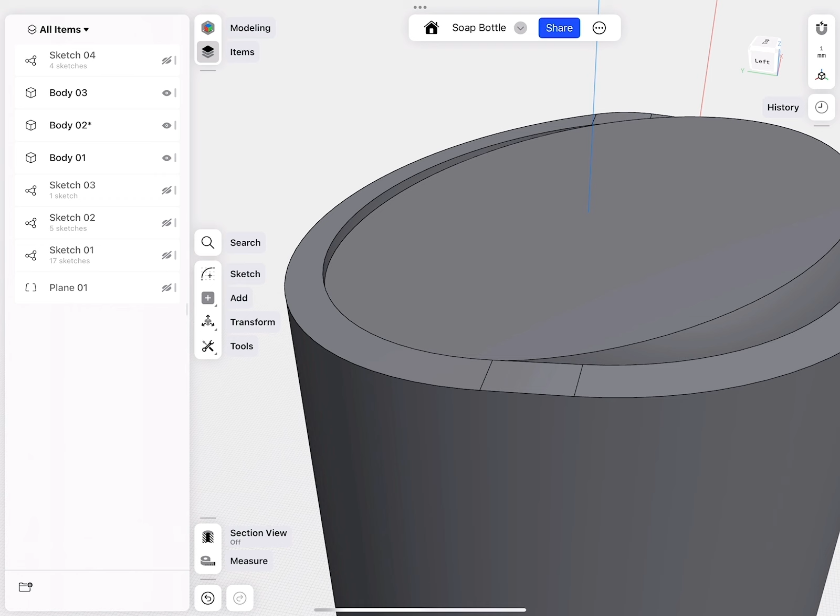Again, easy fix. We go to our history. Here's my construction plane, there's my rotation. This was 10 degrees, and we just add 3 more to it. Need to figure out the direction, so I inverted the value from positive to negative. And there, now this is perfectly matched. Super.

This movement rotation command, when I hold on to it, I can suppress it, then basically it's turned off. And I can unsuppress and then show it, so I don't have to all the time rotate this lid element forward and backwards. I can simply turn the rotation command on or off.

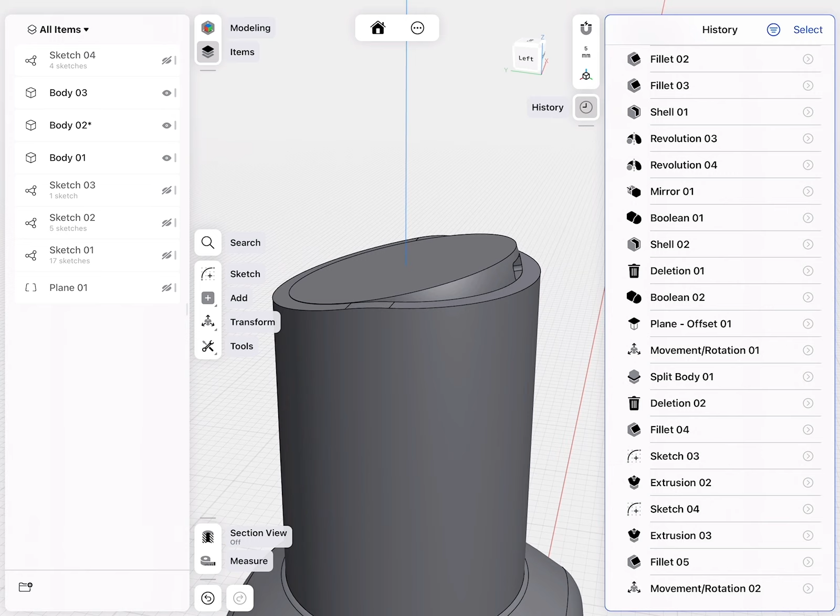In terms of modeling, we're actually now at the stage where we can take a look at the threading. I will create a new sketch. What is really nice is because we make a new sketch that cuts right through this body, you see all the intersection lines and points. For example, here, there's one and there's one. I'm drawing actually these lines down. Very good. And then for the moment, I'm turning all the bodies off so it's easier to see.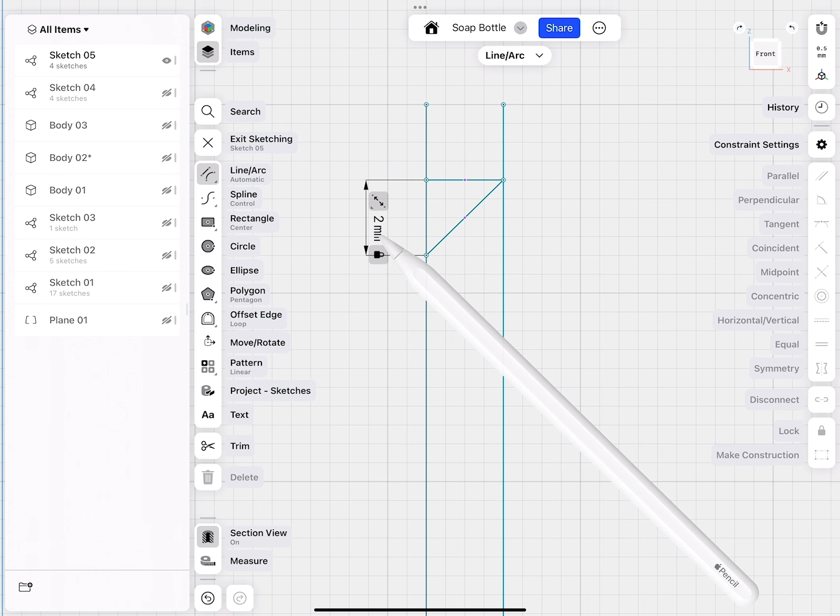Zoom in, the distance is 2 millimeters. So I draw a horizontal line, horizontally constrained, then a line diagonally down at a height of 2 millimeters. Very good. And that is actually the wrong direction. This one I will bring down a little bit. So you see how I'm prototyping my threading.

So this is actually the threading that goes onto the bottleneck, and this is then the contact surface where it will touch with the threading of the cap. And that is actually going to be there, also 2 millimeters. Very good. And then I can move this whole thing up and down to be nice and clean. I can specify this to be at 2 millimeters. There we are, perfect. So let's make the threading for the bottleneck.

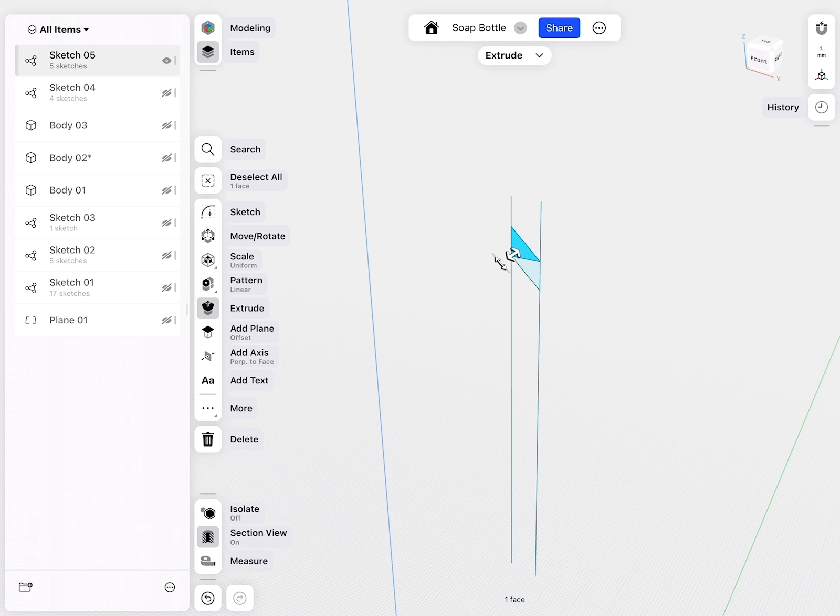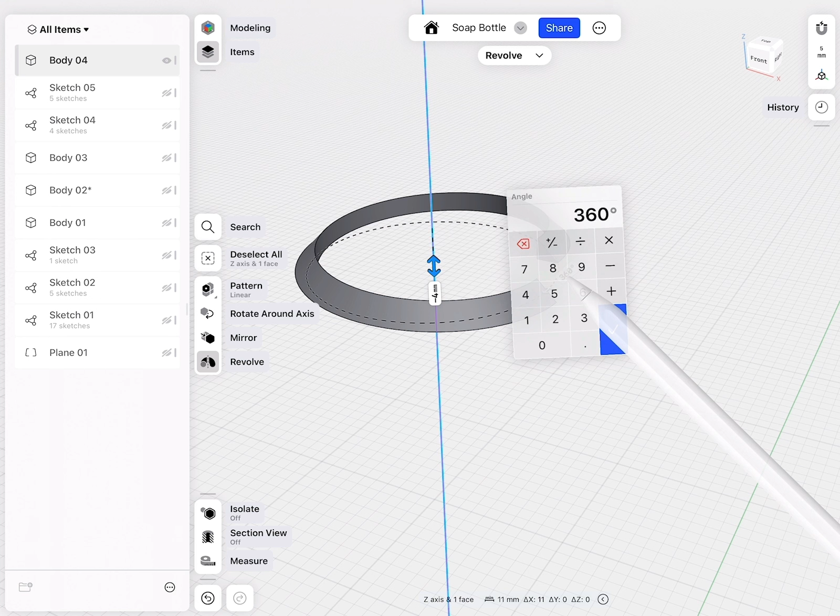Select the triangular sketch profile, select the axis, then we go revolve. I'm still in section view, so turn this off. And here comes the fun part. I'm just rotating this down, for example, by 4, so I have a nice distance. But it's only one turn, 360 degrees multiplied by 2 is 720.

We get an error because then it would intersect. So let's go 8 millimeters down, 720. And there we are, that looks actually really nice.

Turn this sketch on again. Then we select the opposite profile, select the revolve axis, revolve, bring this down also here by 8, 720. And there we see now how this perfectly lines up. Beautiful, no?

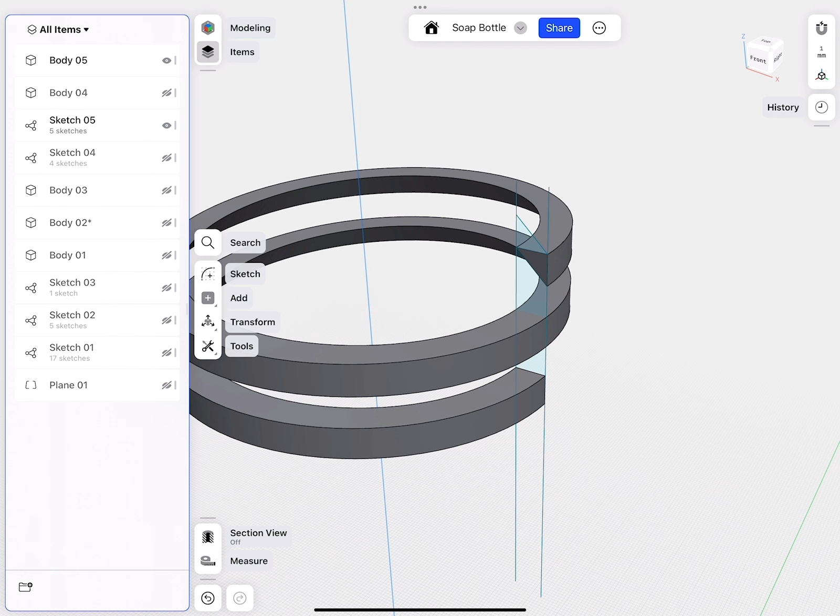Cool, okay, so this is actually the threading for the bottle. Here's my bottle. I will select these two sketches and bring them down a little bit. I can actually clean this up now and drag everything onto one element, so it puts everything into a folder.

Very nice. And the start and end of the threading is a little bit brutal. What's an easy way to fix this? Well, we can select one cap face, then select a vertical edge, and then we simply rotate that face 50 degrees. And we can do the same with the other one.

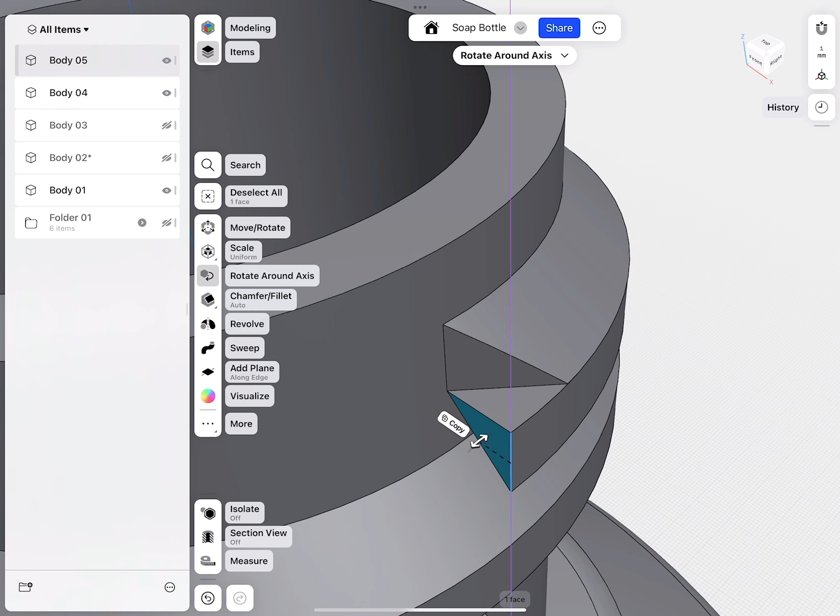There we are. Now that already looks much, much better. Here would actually be this inside edge, and this goes in by 50 degrees. And here, this one to there.

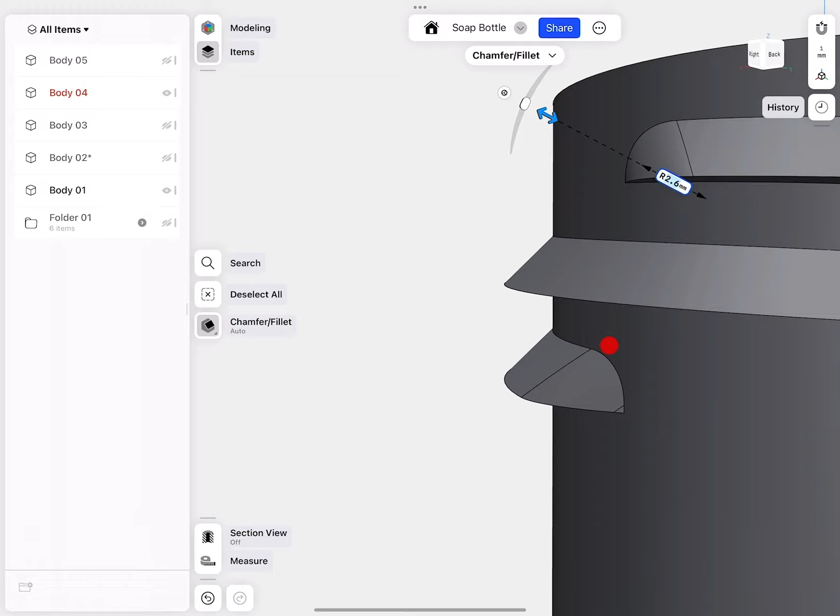Beautiful. These rotations I did are also registered as rotation around axis features and can be adjusted afterwards all the time. So the reason I created this is now I can select these upper edges and very nicely round those. So this is a much better looking fillet.

And then the threading has a really nice start. I might want to do the same also for the other edges. So I can go to history, activate the fillet, go edit, and then rotate my view and add the other edges of the other threading. Click done there. This makes really a lot of sense to work nice and clean and group your command.

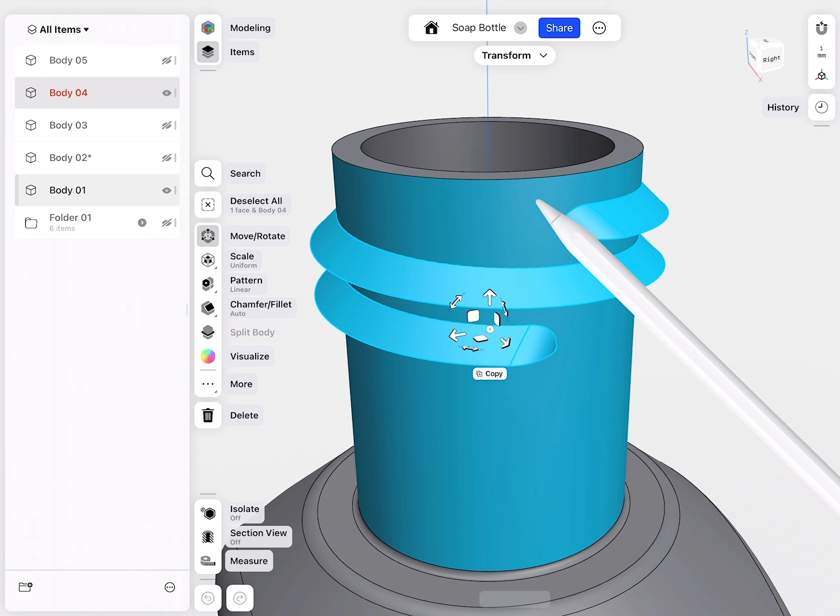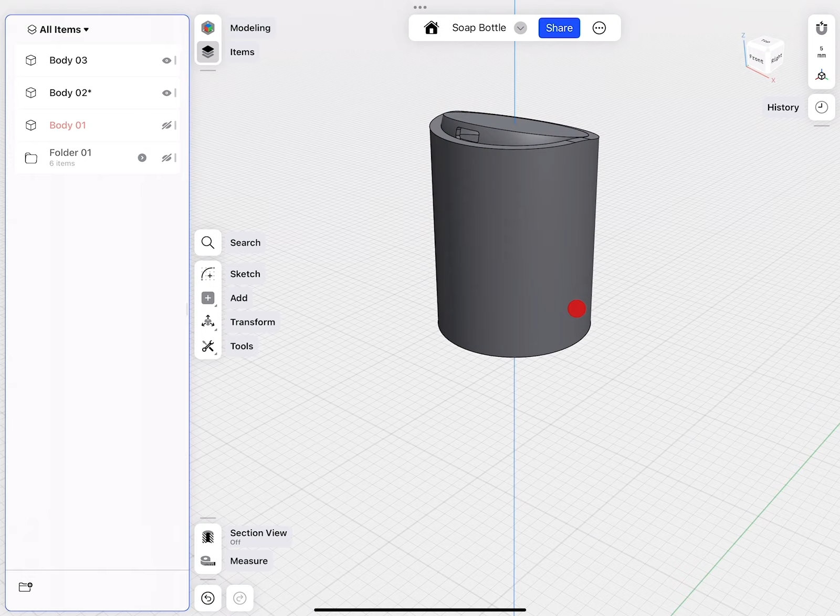Beautiful. So that threading we will join to the bottle by simply double tapping each body and then select union. Very nice. And then we do the same with the housing for the cap. Union and there. Very good. So there we are now. Beautiful.

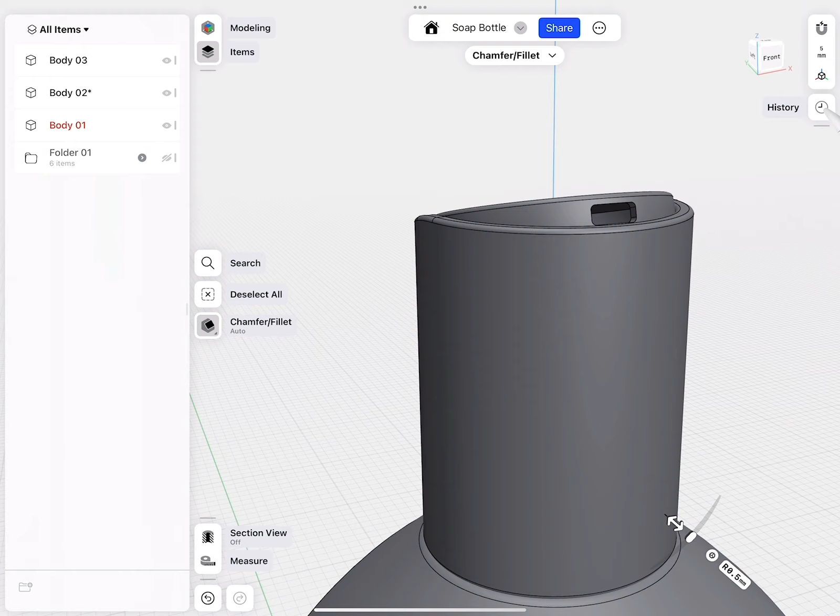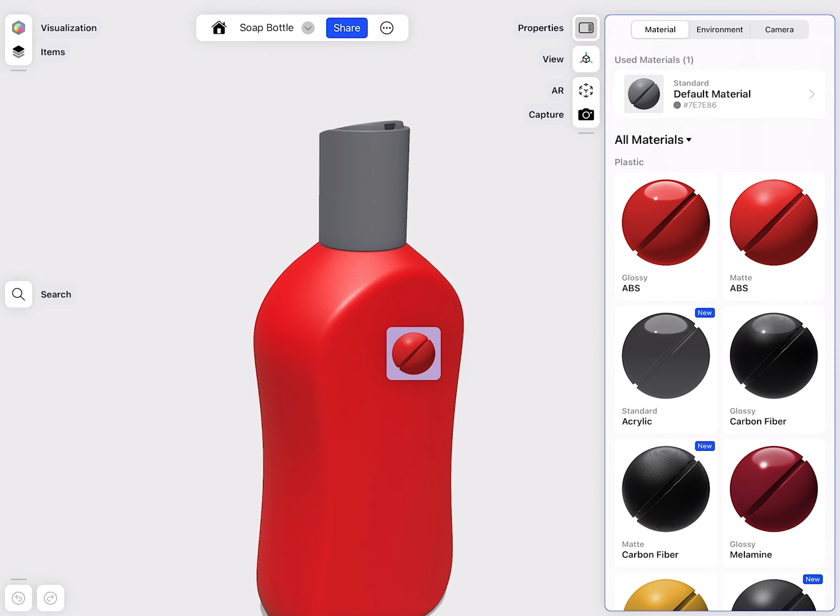So I go to modeling, select visualization. There we are. And we can now decide what type of material here we would like to use. We have glossy ABS, we have a matte ABS. We can drag the matte ABS on the main body and then the glossy onto the top.

Then the glossy I also put onto the rotation element. You see the other material was then removed. That's a red bottle. Let's streamline this a little bit. So the matte material I would like to be, instead of red, simply white. So tapping onto it gives me then the ability to select a white material.

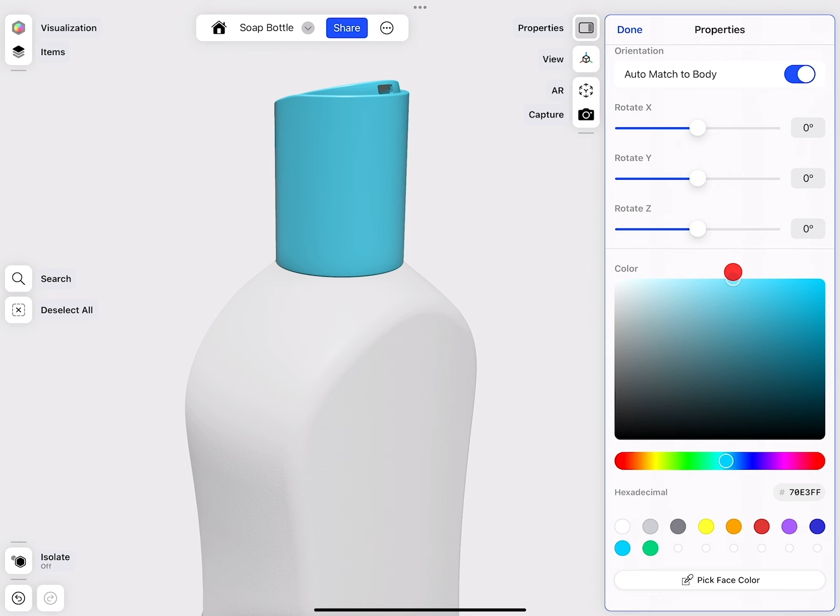Very good. And then the glossy one, since this is going to be for a bathroom application, I give this a nice, kind of like a nice mint color. So there we are. So we can just pick something here, there, beautiful. This looks good. And the white body does not separate really well actually from the background.

That's a very easy fix. We just go to environment. Here we have various options of default background, transparent background, a colored background. And because this is a colored background, we can click on the cog and then also here, for example, give this different materials.

And now you see based on how we work on, do we make actually the cap pop more? Do we make the background pop more? We just play with the color contrast. There we are. Then we have the ability with the rotation for the light to specify where the shadow is and also where the highlight is.

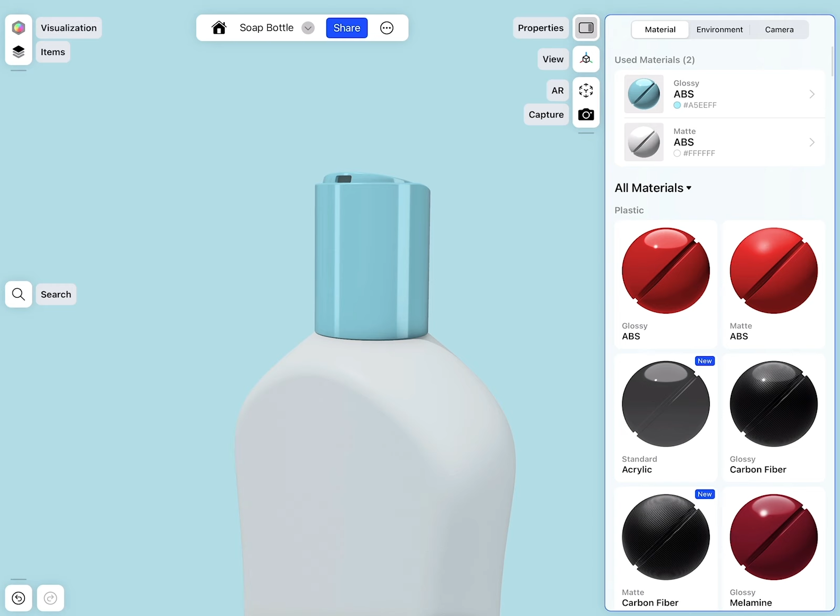If the material for the cap, for example, is way too glossy, it's a very easy fix. So we look down, we have, for example, the PVC or melamine. We can simply select the glossy material. And at the bottom, we changed the color of the material. But on top, you see it says to the right of ABS, change. Select it. And then we can swap this out and select different types of materials.

There. Now this actually works really, really well. Very good. That's how easy you can do very quickly a nice CMF study of your product and then theme everything based on the material and then also the color.

Yeah, and then to create a nice rendering or photo of this, all we have to do is click capture. And that is everything. In this video, I hope you saw how easy it is to create such an organically sculpted body and then also how easy it is to create the threading and prototype a mechanical cap. Have a good day.